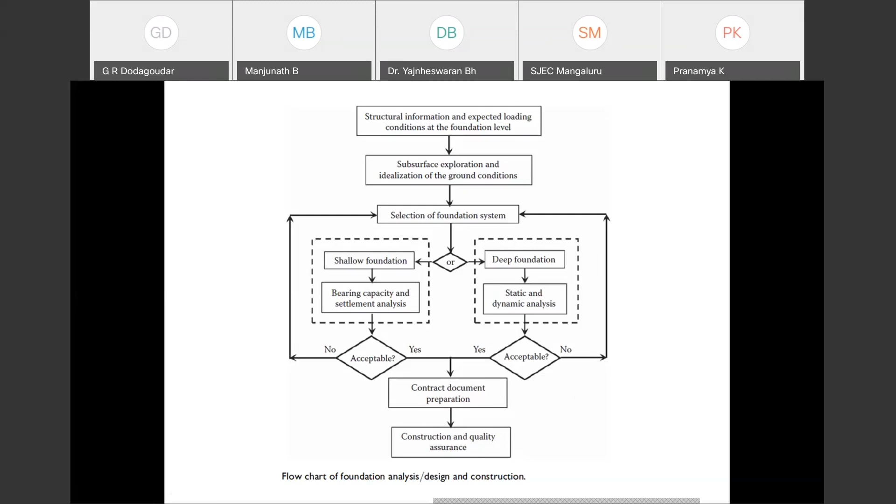You have to meet all the requirements before going ahead with continuation of the foundation construction.

This is just a building model, actually constructed in Bangalore. The name is Jain Swadesh apartment.

If you consider it a fixed base structure, that means you are disregarding the presence of soil or any geologic material. Indirectly, what you are saying is the stiffness of your geologic material is much higher than your structure. Only then do you go for a fixed base structure.

If you want to consider the presence of soil, let's assume it is a raft foundation below that structure. You can replace your soil with a bed of springs—that's called the Winkler hypothesis, which they used to analyze the building.

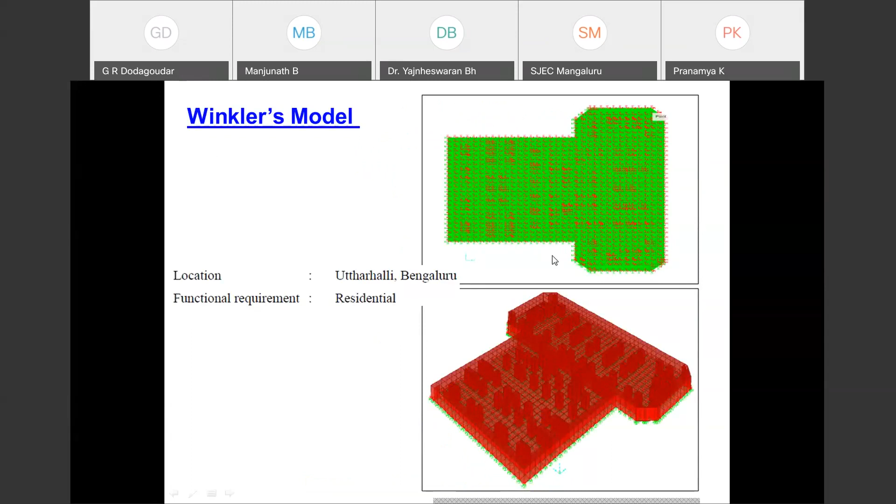This is the model based on the Winkler model, where the raft is discretized and the Winkler springs have been evaluated. Basically what they've done here is consider independent Winkler springs.

In case you want to bring in continuity, one can go for coupled springs. Even if you don't want to use this Winkler hypothesis to analyze your soil foundation structure interaction, one can think of using a certain amount of soil beneath your foundation.

Here you consider soil as a continuum element. You divide the soil into a number of continuum finite elements for analysis, establish the proper boundaries, and then use finite element software to analyze the structural response.

Then you will go ahead and construct the structure in the field.

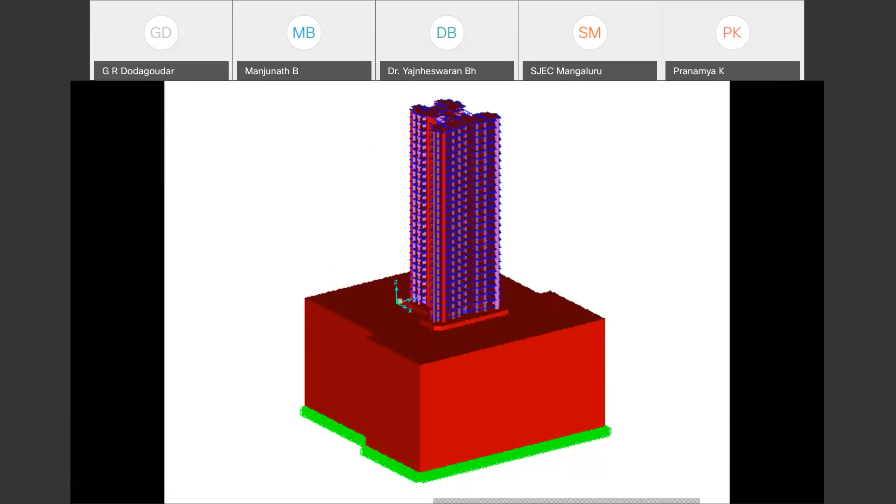With respect to deep foundations, take for example an isometric view of a pile supported structure. It may be any structure—a pile supported bridge abutment, pile supported bridge piers, or for that matter any building.

How are you going to analyze it? These are the piles, and this is the cap. If the cap transfers a certain amount of structural loading, it is called a pile raft foundation or combined pile raft foundation. How are you going to analyze this?

As far as our present topic is concerned, I want to tell you about two approaches: one is the substructure approach, and another is the direct approach.

In the substructure approach, how do you model it? First, you have to reduce your physical system into an equivalent mathematical model. Once you say it's a mathematical model, it simply means a differential equation. Once you have this model, you think of using the substructure method.

Earlier, we used to use the substructure method, but nowadays there's no point in going for this, since software is so powerful. In a single go, you can analyze the combined soil structure system.

How are you going to analyze your soil structure interaction effects using the substructure approach? These are the ingredients of the substructure approach: theta FIM and U FIM are the foundation input motions with respect to rotation and translation.

Then basically, what are you doing here? These are the pile elements, and the soil is replaced using a set of springs. To take care of tip resistance, you use KT. To take care of PY resistance, you use KH. To take care of skin friction, you use KV.

Then you combine with the structure and perform the soil structure interaction analysis. In this case, only linear analysis is possible—basically you split into two parts, analyze, and combine the response. Combination of response is possible only when you consider linear analysis.

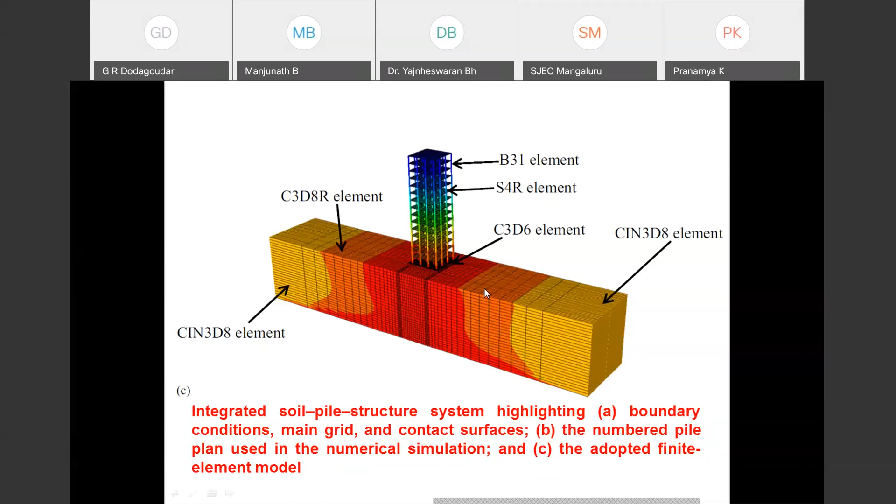Anyway, we have to go for development. When you are going for development and progress, please keep this in mind: sustainability is very, very important. Otherwise, there is no point in going for it. Otherwise, what will happen? You will not keep anything for the future generation. And then, how sustainable development will be useful in case of engineering and design.

And then a few books, especially for the students, those who want to explore this particular field. There are standard books, and most of the books are available online through those web pages.

Then I want to tell you how you are going to learn concisely. There is no point in using a brute force approach. Nowadays you can use the techniques. And then I want to explain a little bit about mathematical modeling of a physical system.

Then followed by basics and analysis of soil structure interaction: the kinematic interaction, then inertial interaction, and then analysis of a simple soil structure system. Then I'll go on to the soil pile structure interaction.

Herein I am going to discuss a little bit about forms of loading, pile subject to axial loading, pile subject to lateral loading, and how you are going to use the differential equation in order to know the pile resistance to the applied loading, then coming to pile groups, and finally dynamic response analysis.

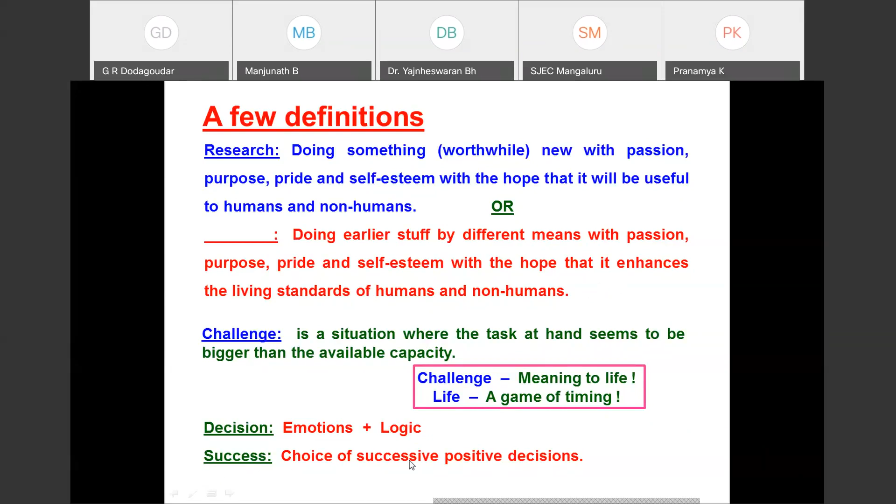Many times you're going to create controversy, or sometimes you will accept that at least you don't know something. At least accepting that I don't know something is also a type of knowledge. And then, why do you do research?

First of all, what is the objective or aim of doing research? First, I want to become a top-notch researcher, or else I want to do something great for our country. That is how the aim and objective will be there. Specifically, the objectives of our research are basically to experience the sheer joy of research, through happiness, ecstasy, and delight. The second is to share this joy with fellow researchers, to inspire future generations to pursue this career. This is also very, very important.

You have to bring in the young generation to continue this profession—for publishing new findings, for name and fame; anyway, people are doing this, even in IIT. Improving the designs: even though you are not going to create new knowledge, at least you have to improve the existing design methods according to currently known procedures. That is also very, very important. That's the reason I have given the second definition of research like that.

Then lastly, for the well-being of fellow countrymen and women. And then you have to do something for non-humans, because we are depending heavily on non-humans. These are the objectives of carrying out research.

This is what I already mentioned: our outcome of research gets value when you publish in good journals. Research means a lot of thinking is involved—productive thinking is also called research. Thinking clearly and effectively is the greatest asset of any human being. One has to think properly. If you are thinking improperly, you see what will happen.

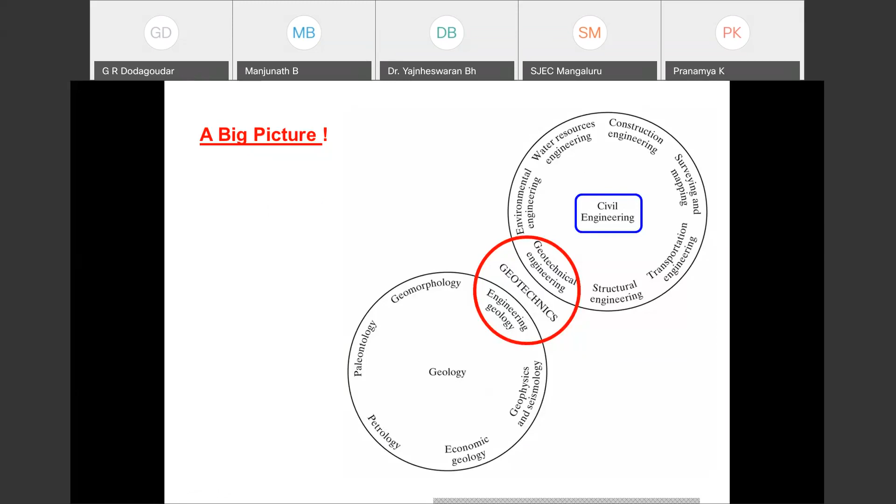And then from the source to the site of interest, that energy has to be propagated in the form of seismic waves. Basically, the seismic waves are the agents of energy transportation. Energy will be released here, and that energy has to be transported. It will come and hit your structure, then you have to analyze it. We will talk a little bit about wave propagation later.

Okay, what is geotechnical engineering? It is a simple definition. Basically, it is concerned with the engineering behavior of earth materials. When you talk about structures of geotechnical engineering, these all come under the structures of geotechnical engineering.

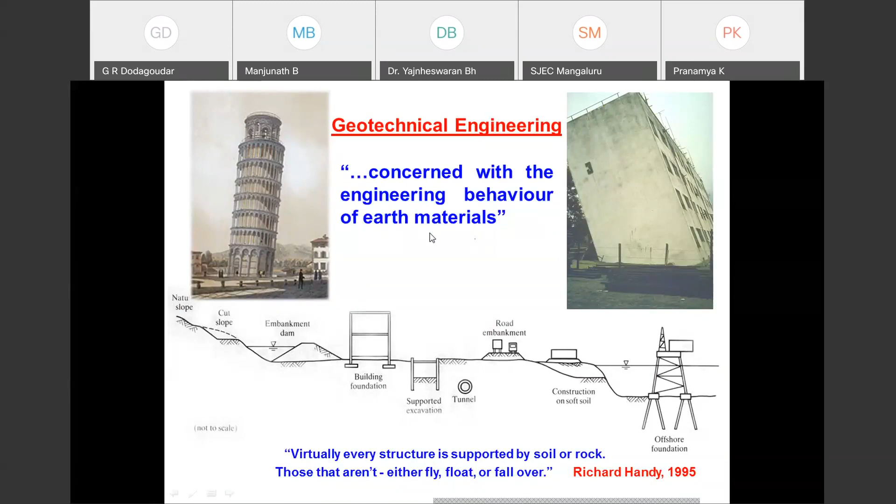Then, how do geotechnical engineers miss the big picture? Most of the times, we don't know what the big picture is. Big picture in the sense that you have to have a comprehensive and qualified understanding of everything before attempting to solve any problem in geotechnical engineering.

In that sense, please take this question. First of all, you have to understand what is the biggest problem. How do you solve the biggest problem? We will see that later. First of all, you have to identify what the biggest problem is. Once you identify it properly, there are many experts or many software tools available. How are you going to solve the biggest problem?

Let's see. Now we will look at sustainable development. Anyway, development has to take place, but it has to take place in a sustainable manner. With respect to that, this is a statement given by Einstein 70 years back: we shall require a substantially new manner of thinking if mankind is to survive. You can see the seeds of sustainability were shown at that time already.

It is our duty to understand the meaning in between these words. Okay, what do you mean by sustainability or sustainable development? It is a comprehensive definition: a concept describing mankind's ability to create a world for humans and non-humans that environmentally, socially, and economically provides for current population needs without damaging the ability of future generations to take care of themselves. This is very, very important.

Basically, if you put this definition in simple terms, you have to enjoy enough, you can allow others to enjoy enough, and then finally you have to keep enough for the future generation to take care of themselves. That is the definition of sustainability.

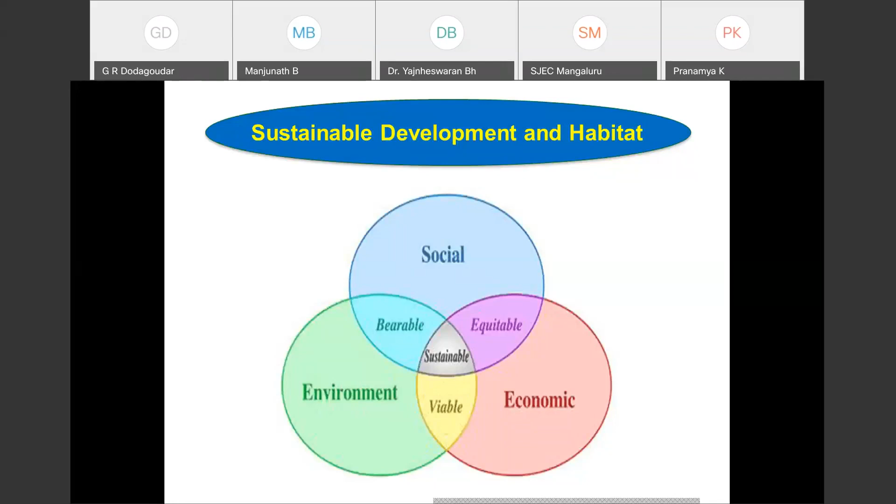Okay, then how to handle this? Basically, you have to jump into environmental design. There are two things in this: one, design for environment, where usually you talk in terms of 10, 20, or 30 years. Now, anyway, that is also outdated. You have to go for a design for sustainability.

Anything you do on ground will definitely have some impact on the environment. If the impact is very small, the environment will take care of it, and you're not going to have a lasting impact. But if your impact is too much, then you're going to damage the environment.

That is the reason one has to be very careful. Even though you are going for foundation design, please think of minimum more than 100 years, or even 500 years, especially when you are building temples or creating historical constructions or legacy for the future generation.

Then what is development? I hope you know what is development. Let's assume you have got degrees from BTech to MTech, MTech to PhD. No doubt it is a development, but the development has to lead to progress. That progress has to lead to wealth. Then only it is called development, otherwise it's not development. Development maybe is having progress plus wealth inside.

Okay, and then with respect to the sustainable development, these are my definitions of engineering. This is the definition of engineering: application of scientific principles to the solution of particular problems in a safe, efficient, and economic manner. Otherwise, a simple definition follows like this: an activity concerned with the creation of new systems for the benefit of mankind.

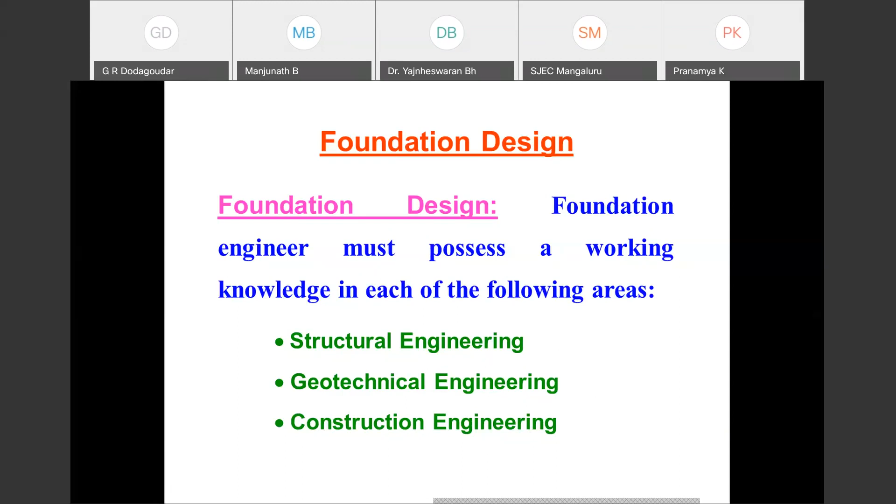Then with respect to foundation design, the foundation engineer must possess working knowledge in each of three areas. Structural engineering, you have to know a little bit about structural engineering. Even though you are not doing anything, at least you should know how structural engineers are going to evaluate the loading at the foundation level. You have to think of how to design foundation, not only with geotechnical considerations but also structural considerations. You have to understand the principle and design methods of geotechnical engineering, and also a little about construction engineering. Let's assume you have designed a foundation. If nobody comes forward after raising the contract documents, that means your structure is so complicated that with existing tools or whatever methodology is available in India, it's not possible. That's the reason we have to understand construction engineering a little bit.

Okay, with this we'll move on. This is what is the big...

Sir, sorry to interrupt. Participants are feeling it's a little fast. Okay, no, basically these slides are very simple, they are all self-explanatory, that's the reason they should be very fast. The new generation will be much faster than us, that's the reason I have given it this way. No problem, I'll go slow. Don't worry. Okay, okay, okay.

Dear students or participants, this is the role and scope of foundation engineering, or geotechnical engineering, or you can say it is ground engineering. An understanding of geological structures is also very, very important.

Let's assume unknowingly you have put an important structure on a fault. Then you think of, after construction of a 100-story or 120-story building, what are you going to do? There are many ways how to remedy the situation.

An understanding of geological structures, materials and processes, combined with systematic application of investigative, scientific and mathematical techniques, produces practical solutions to ground related problems for the benefit of society.

Whatever you do, you simply go out and literally watch construction activities with little understanding about geotechnical engineering. You'll understand the role and scope of foundation engineering.

These are the general types of problems encountered by engineers, basically design. If you don't know design methods, you're not going to do any design. Then even though you have a design, in order to check whether it is properly designed or not, you have to understand something.

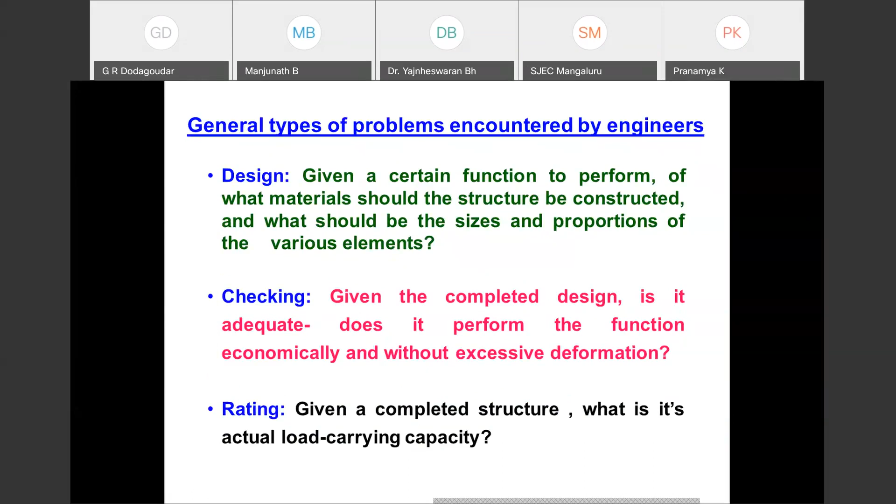In that sense, I have given this. Then design and design processes are intensely related. What do you mean by design?

I already said another definition of design is a process by which an optimum solution is obtained. The solution is supposed to be optimum, but you don't have to go for a 100% optimum solution. In any design, certain criteria must be established to evaluate whether or not an optimum design has been achieved.

Basically, if you talk about shallow foundation or deep foundation, you have to satisfy the bearing capacity requirement, as well as your settlement should be well within the allowable limit. That is how we are going to satisfy the design criteria.

With respect to this particular foundation, it is called a combined pile raft foundation. This is the raft, these are the piles. If you are not allowing the raft to transfer any load, it is called a pile cap, which simply transfers the structural load coming from the column through the pile cap to the piles. If you are allowing a certain amount of structural loading to be transferred via the raft with direct contact with the soil, it is called a combined pile raft foundation.

Let us assume F total is the total load coming on your structure. The resistance is coming because of your pile, which has two types of resistance: one is the tip, and the other is the skin. Then you will also have resistance offered by pressure.

Your total resistance offered by the combined pile raft foundation (CPRF) should be much higher than your F total, which is your structural load. Load is supposed to be less than or equal to resistance. This philosophy one has to use in order to satisfy any design criteria.

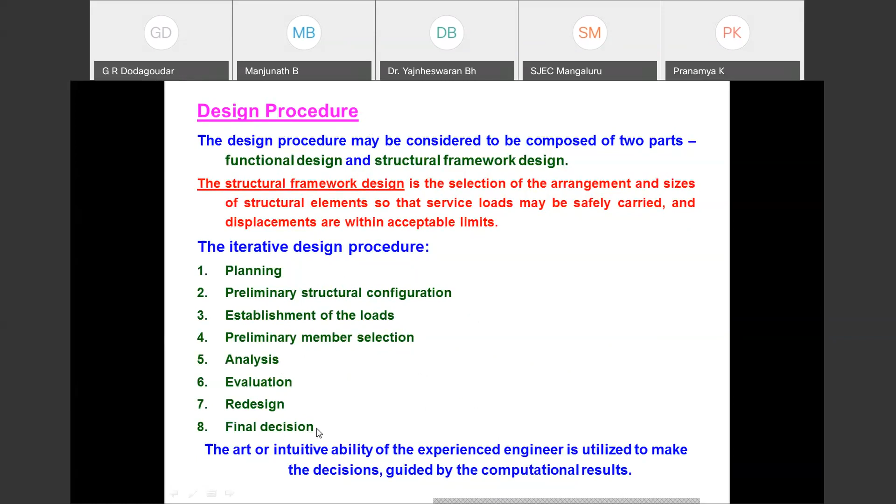For that, you have to depend on the IS codes or other codes. Then you have to select preliminary member selections, perform analysis, evaluate, and redesign. Basically here you are going to use the loop. Then finally you will go for the final decision, while making use of the intuitive ability of the experienced engineer.

Building and design codes are equally important. Whenever you want to build something, you have to follow the relevant design codes. The design codes are not ultimate, and they may not be much wiser than your engineer, but in case you don't have any design codes, people won't follow any rules or regulations, and they will put the public in danger. That's the reason: in order to protect the public from excessive damage due to not following the codes, one has to follow the codes.

What do you mean by design? Design means it has to satisfy certain loading for the designated time or under certain environmental conditions. Take for example earthquake resistant design: you are going to specify certain earthquake loading, use that loading, then proportion all the building elements, and then conceive the structure as a system.

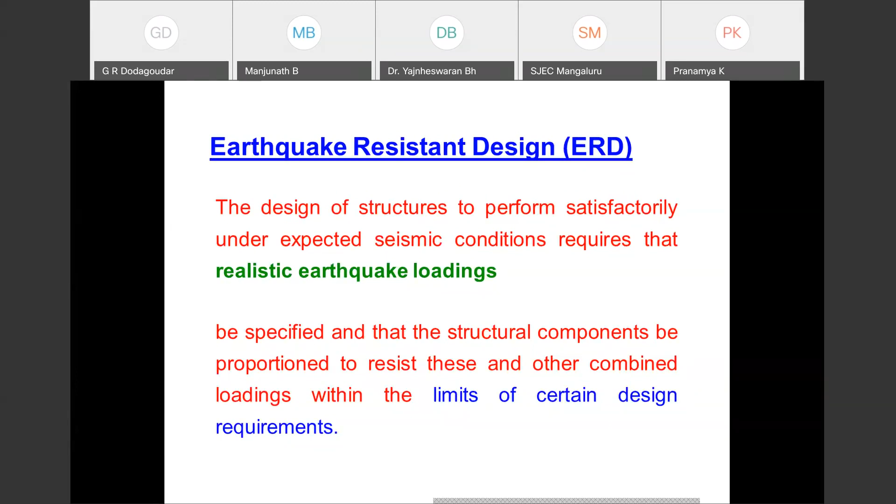If that structure is subjected to that particular loading, it should behave the way you intended. Then you can say the structure has been designed properly.

How does one assess the acceptability of engineering design? There is no single answer for this, it varies from person to person. In case you have a lot of uncertainties, even in your soil report or in the properties of your structural materials, you have to quantify the uncertainty.

In case you want to do a little more in earthquake engineering, we follow the term called performance-based design. How complicated does it need to be? It should not be too complicated, otherwise others will not understand. Especially at least 50% of understanding should be there for the engineer who is constructing on field, so you have to keep that complexity within that limit.

Anyway, this I already told: application of results of known methods of analysis is a design.

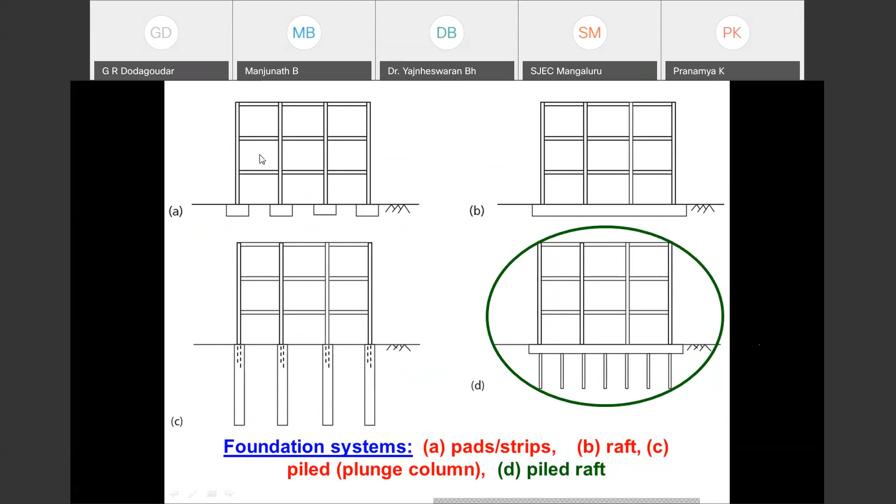Now, these are the different foundation systems. Here we have shallow foundation, the raft is also a shallow foundation. Sometimes you have a pile foundation or plunge columns. This is what is our pile raft. These are the different options for foundations.

If the ground is perfectly all right, you can bear on natural ground. Otherwise, you can replace the ground and fill with good material, or have compacted, consolidated ground, or have a composite ground, maybe foundation on stone columns, and then go ahead. Otherwise, if you have very soft or weak soil beneath the ground, you have to bypass using solid inclusions called pile foundation.

This is what we have already seen, it is a pile supported structure. When you talk about pile raft foundation, let's assume it is a raft, these are the piles. I want to transfer the structural load as per a static analysis and design of PRF, pile raft foundation, is concerned.

What is the big picture? The big picture is simply load versus settlement, that's all. As per static analysis, depending on your understanding of the soil structure interaction effects, you can decide. You can keep your pile and raft together under elastic, then leave here at this level. This is your allowable settlement, and this is your allowable load on the structure.

In case you want to make use of your piles at working load, that means serviceability load, you can increase certain loading, but one has to be very, very careful. Sometimes you will be somewhere here, that means 10% or 20% of this line. That means basically you are effectively using your solid inclusions under serviceability loading.

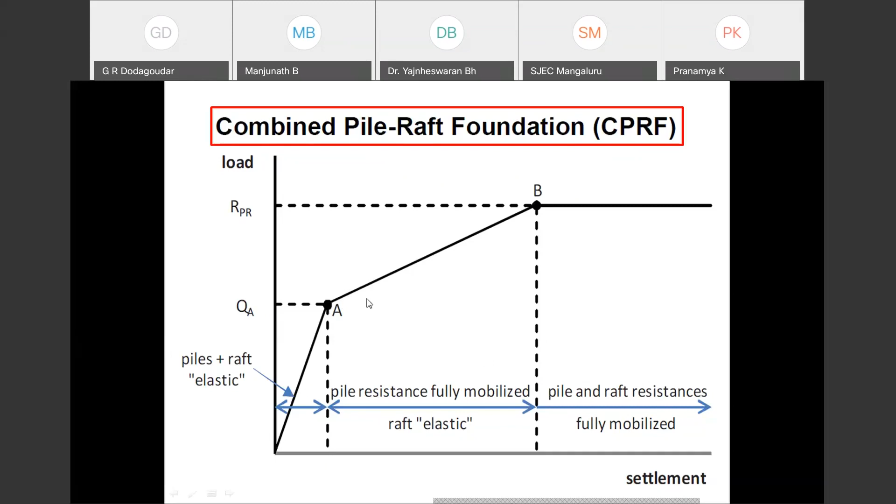As for dynamic loadings, you have to get this loading under cyclic loading, basically considering the degradation in material properties. Then you have to choose the analysis procedures accordingly.

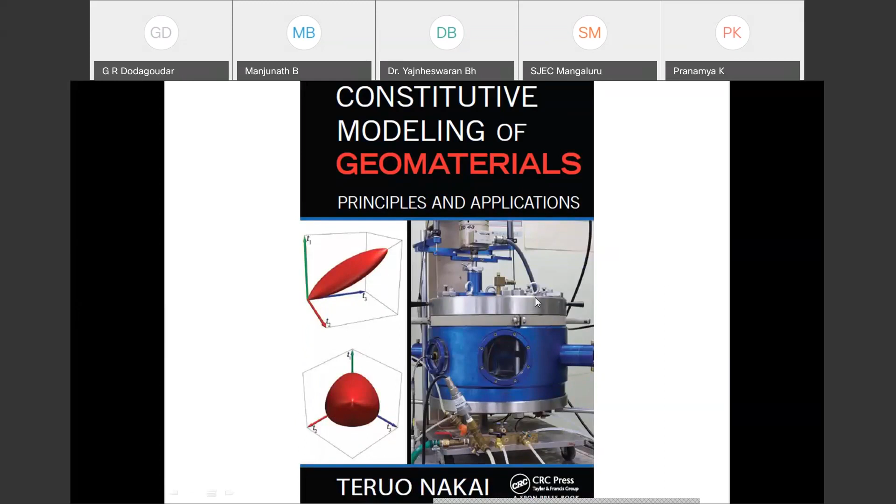And then if you want to understand the constitutive models, basically stress strain relation, this is the most comprehensive book, recently published by CRC Press. This is also available. And then this is Advanced Geotechnical Engineering, here they have considered a lot of soil structure interaction effects, written by Desai and Zaman.

The Zienkiewicz book is a little bit advanced. Only after studying from simple books, please jump into that.

What do you mean by mathematical modeling? And what is finite element? In mathematical modeling, you will end up getting differential equations most of the times. Then in order to solve differential equations, there are a number of techniques, but FEM is more powerful and it is also one of the most important contributions of the last century. So how are you going to study this concisely?

Say I want to become an expert in soil structure interaction. First, you have to understand the soil structure interaction effects, and how these effects will govern the behavior of your foundation as well as structure. For that, you have to have certain background and historical knowledge. Let's assume the soil structure interaction effects have been disregarded during analysis and design. What will happen if you erect that structure on ground? Definitely you're going to see some severe damages or collapse. Then some idea or concept has to be there.

Then you have to talk about the principle. Principles are very, very important. Once you have a principle based on certain approximations and assumptions, you can develop from there and get the theory. Theory means most of the times these are equations—in our geotechnical and structural engineering, these are differential equations. Once you have equations, simply you have to solve them. Before putting those solutions on ground, you have to validate using experiment.

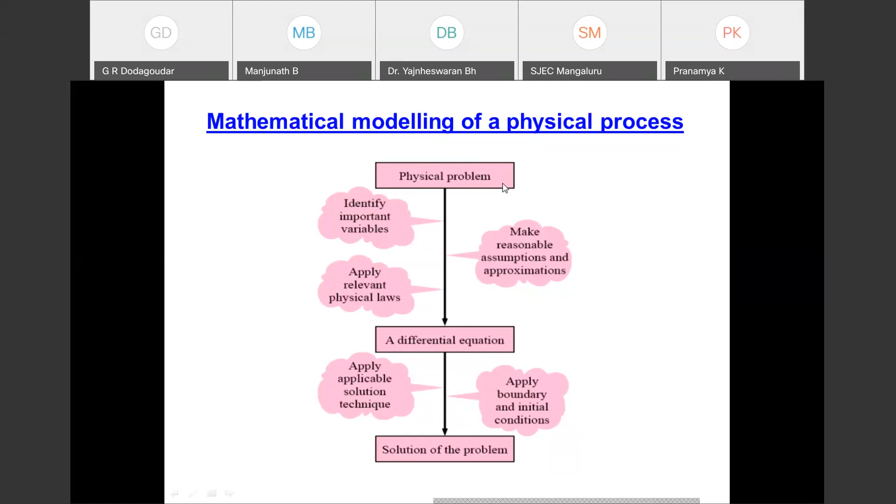In order to analyze your structure for dynamic loading, fixed base structure subjected to earthquake loading, you can simply make use of mx double dot plus cx dot plus kx equals minus m times ground acceleration. In order to derive this equation, you have made n number of assumptions, and then you have made use of F equals ma. That is the principle. This differential equation itself is a theory. If it is simple, you can apply the applicable solution technique. Then you have to apply boundary and initial conditions. Get the solution. The solution has to be understood with proper knowledge of your physical system. That's it. Then you are addressing all these questions as part of mathematical modeling. What you have to see is, is there a relation between the type of physical process considered and the equations that result? This is very, very important.

You can see this to understand. For steady state seepage, you're going to get the Laplace equation. You may be using H, del square H by del X square, something like that. It is a general field variable. As far as consolidation is concerned, you have this equation with CV, coefficient of consolidation. As far as one dimensional wave equation, you have some coefficient.

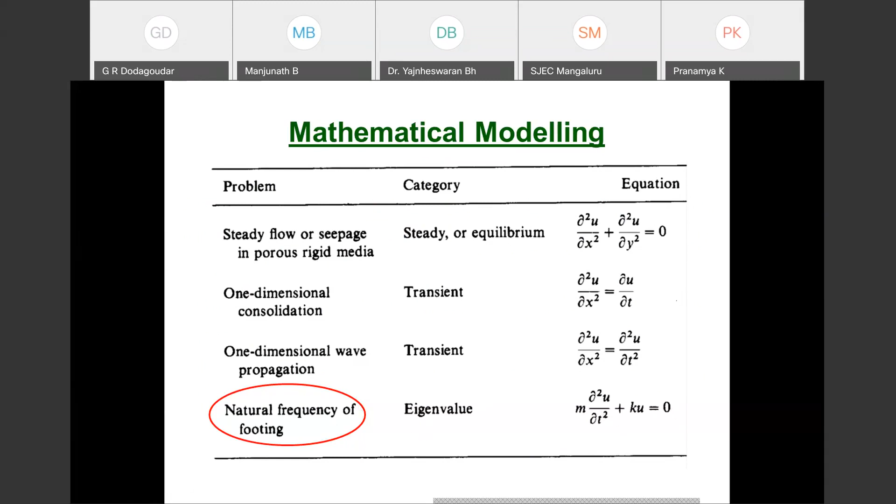In order to analyze the frequency of your footing or foundation, one has to go for a generalized eigenvalue problem. If you set it up, you will get mu double dot plus ku equals 0. You will solve and get a set of frequencies, and corresponding to each frequency, you will get the mode shape. Then you will analyze your building accordingly.

Basically, your continuum mechanics, I hope you know what this subject is. Continuum mechanics is the birthplace of mathematical models. Why study finite element? Once you have the differential equation, you can use any number of methods, but finite element is very powerful. That is the reason one has to go for finite element.

This is the big picture about finite element. You can do physical modeling, maybe 1G or NG, and still predict the behavior of your actual structure before you erect it. Otherwise, you can use numerical modeling like finite element. But finite element requires constitutive models. These constitutive models have to be verified by performing element tests. I hope you know we are doing a lot of element tests in the lab. With that, you will get the parameters of the constitutive model.

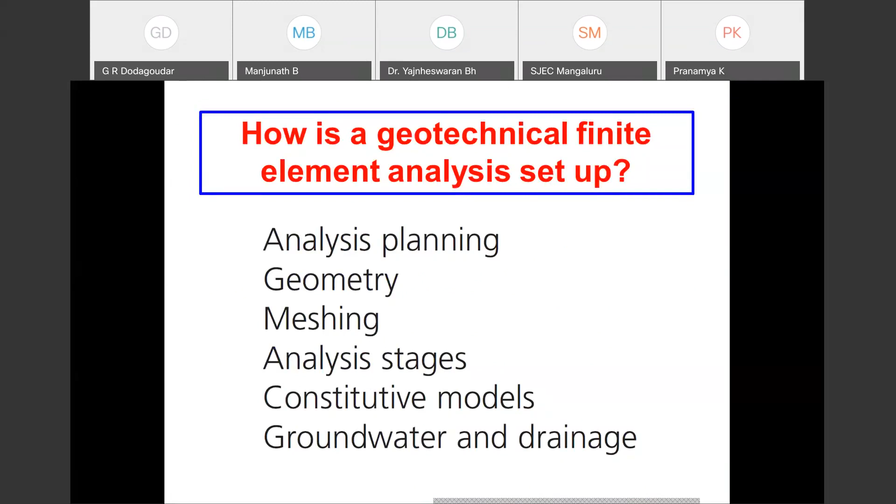There are a few questions associated with finite element analysis. How is a geotechnical finite element analysis set up? You can put your structural engineering or even water resource or environment. How is a structural finite element analysis set up? I hope you may know this using SAP or STAAD Pro. And how are constitutive models selected? This is very, very important. You have to understand the structural loading, type of subsurface profile, and those properties. Then you decide whether a linear constitutive model is okay, or non-linear, or advanced constitutive models are required.

And then, how are soil and rock parameters obtained? For that, you have to perform laboratory and field experiments. Then, how are geotechnical structures modeled? How are you going to model your structure? How are you going to choose the constitutive models for structural materials? In case you suspect interaction effects are there, how are you going to consider the soil structure interaction effect?

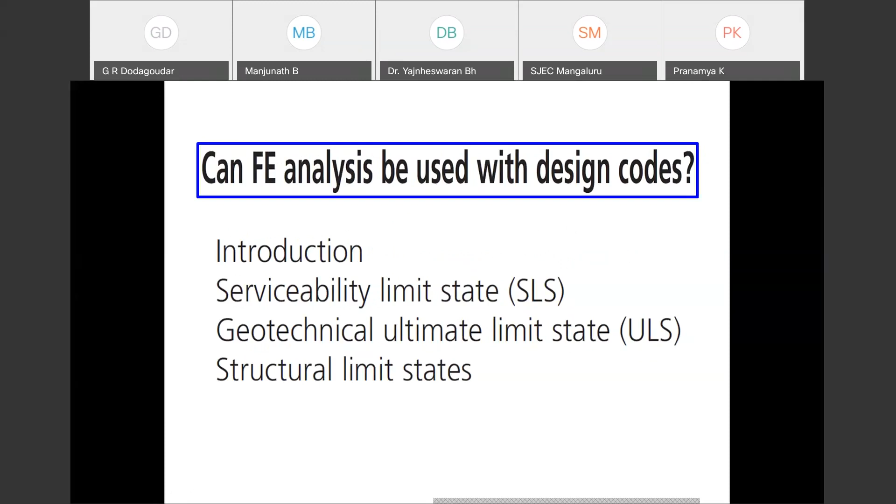Then, can FE analysis be used with the design codes? Yes, right now you can use it. In STAAD Pro, you have almost all the codes. Then you can address all these limit state requirements.

These are the finite element results. These are actual results coming from the load test conducted by Hyder Consulting. See the maximum load on the pile head, that is 60 meganewton. The corresponding maximum pile head displacement is 2.2. Finite element is able to touch the maximum 60 meganewton, as well as the settlement obtained is 2.6. Invariably, finite element has to give a little higher deflection or settlement for the lesser load. Perfectly all right. These analyses have been performed in Germany.

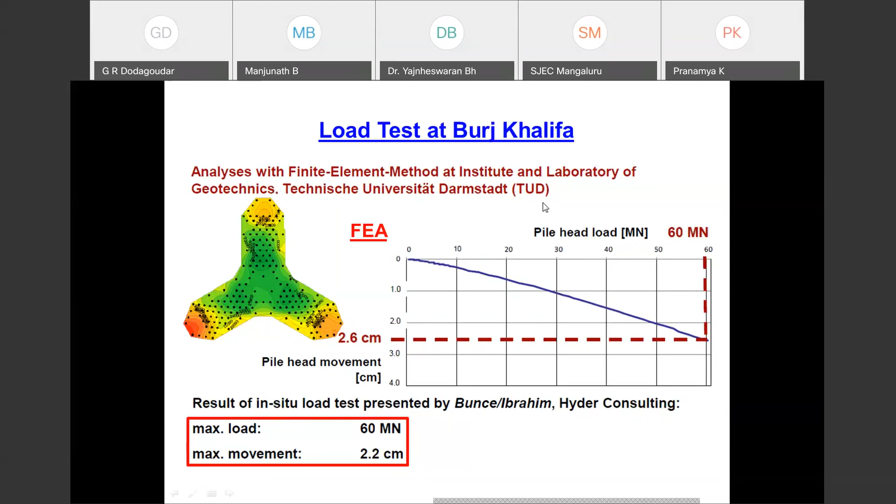Along with the construction, design principles are equally important. I have touched a little bit about this. During construction, one has to monitor.

During monitoring, you have to make a lot of decisions, making use of this observational method. Based on monitoring, you are going to get the settlement information or whatever, and then you have a computational tool. Literally, you have to play in the computer.

After considering 10 story, what are the settlements? After considering 20 story, you compare. If any action is necessary, if you have not defined your loading properly or your building process, basically how are you going to construct?

One should not erect anything on ground in 1 day or 2 days. You have to understand the settlement behavior of your soil. Accordingly, you have to decide the rate of loading, basically rate of erection of your number of stories. That is how we will make use of this observational method.

But one has to be very careful when using analysis, especially numerical analysis tools. You have to understand that quality control and assurance is also very, very important during construction.

Then comes the soil structure interaction. I want to touch upon a little bit of basics regarding kinematic interaction, inertial interaction, and simple analysis of soil structure interaction, and how one has to perform this using SAP and STAAD. What are the effects? Please understand the effects - if you don't consider them what will happen, and if you do consider them what will happen.

With respect to soil structure interaction analysis, I'll talk a little bit about deep foundation. Then I want to tell you a little bit about how you are going to analyze your single pile for shaft behavior - that means shaft and tip. Then analysis of single piles for lateral loading, then different forms of loading, and then pile group analysis, and then a little bit about the conclusions and remarks.

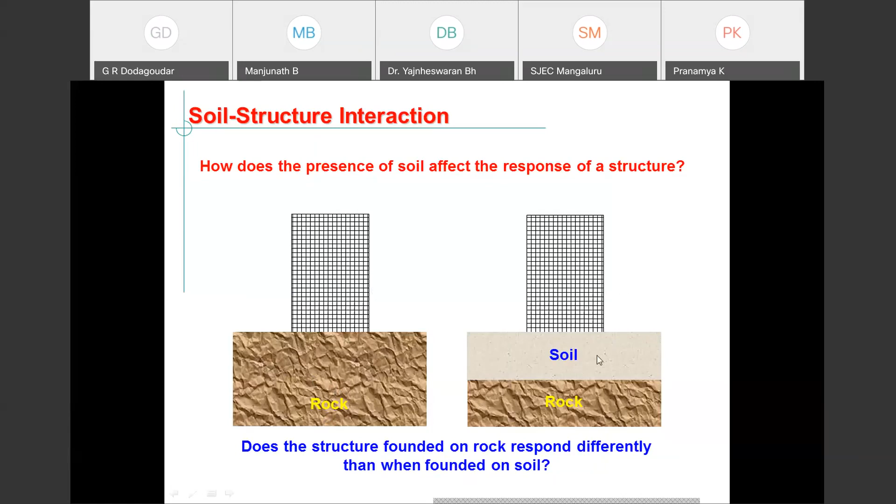Okay, these are some definitions. Let's assume you don't have any structure, and it is subjected to earthquake ground motion. If you record this through some recording instrument, basically the variation of acceleration with respect to time, it is called free field motion.

Basically, it is at the ground surface. If you have a foundation, and you are able to record the motion at this level, it is called foundation input motion, also called FIM. Basically, you have 3 translations and 3 rotations.

How does the motion at the base of the structure differ from the free field? Definitely, because of the confinement effect, you are going to have a different input motion here. That is the reason it is called foundation input motion.

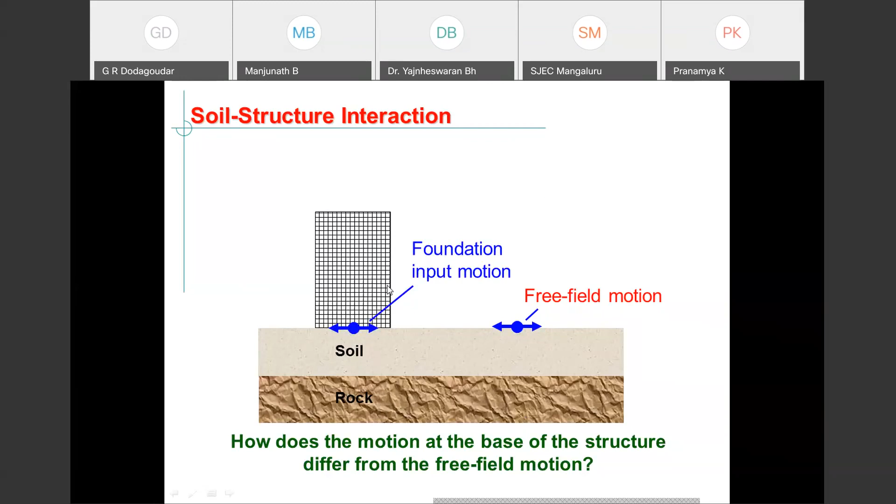If your soil profile is subjected to earthquake loading, and you have an instrument, it is called free field ground motion due to propagating seismic waves.

Let's assume you have a structure founded on a certain foundation. This is your ground motion at the building - if you are treating it as fixed base, and if you are a little far off, let's assume 100 meters away, there you are going to have the free field response. When you are close to your building, this motion is influenced by the presence of your building. That also you have to be very, very careful about. If the structures are closely constructed and they are very tall, then you have to be very, very careful.

If you want to get the response, basically you are going to get the response - the acceleration at the building top or wherever you want. Once you know the response, you can literally evaluate all force resultants or even deformations in the building. Okay, what is the definition of soil structure interaction? This is the definition.

The response of the soil affects the response of structure, and the response of the structure affects the response of the soil. This mutual interaction effect is called soil structure interaction.

Over the years, soil structure interaction effects have been studied under two headings: kinematic interaction and inertial interaction. Now there is no point in going for kinematic interaction and inertial interaction separately and adding together, because of powerful software, one can attempt all these in a single go. Just for explanation, I'm going to explain here.

What do you mean by kinematic interaction? Presence of stiff foundation elements on or in soil causes foundation motions to deviate from free field motions. The moment you don't have anything in the ground, you are going to have the free field motion. The moment you put your foundation, even though you disregard its mass, you have to consider the stiffness and geometry of your foundation as well as the soil. You are going to get a different free field motion. That is called kinematic interaction. Basically, you are going to get FIM.

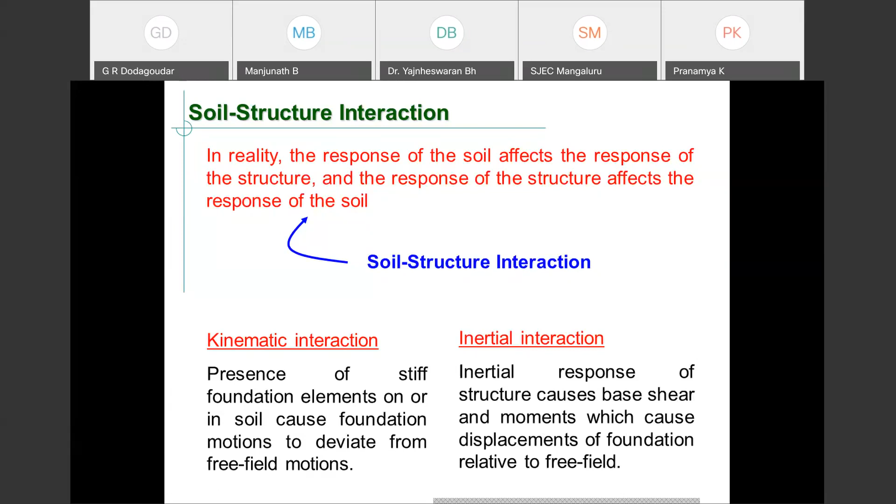Inertial response of structure causes base shear and moments. The moment you vibrate your structure, those vibrations pass to the foundation in the form of shear and bending moments, which in turn cause displacements of foundation relative to free field. These things you have to address.

How are you going to handle this? What are the effects of kinematic interaction? There are three effects. First is base slab averaging, which comes because of stiffness of foundation. Another one is embedment.

Basically, let's assume you have a pile foundation. Embedment is basically the variation of ground motion with depth. Take for example, you have a pile of length 30 meters. How is your ground motion going to vary all along the length of your pile? Take for example, you have a shallow foundation, thickness hardly 2 or 3 meter raft. Even in that case, ground motion is going to vary.

How are you going to quantify this? Let's assume an earthquake, basically waves will come and hit at the corner. What will happen to the intensity of your ground motion? If your incoming ground motion has high frequency content or low frequency content, what are the effects of wave scattering? Let's see what will happen.

What is the meaning of that? Surface motion is equal to free field motion. There is no rotation at the surface. Basically, you cannot see any rotation.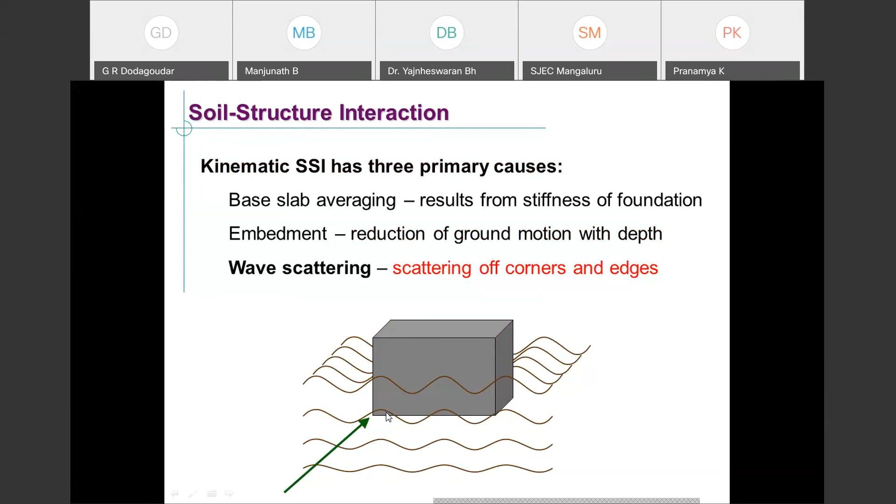The next one is scattering - how the waves get scattered at the corner. The wave comes, hits the corner, and this is how it gets scattered. This has an important effect with respect to the amplitude of high frequency components. Basically, it reduces the amplitude.

That anyway you have to account for while analysis of kinematic interaction. Okay, how are you going to do the soil structure interaction? What is SSI? SSI basically results from the compliance of soil, meaning soil is not going to have stiffness more than your structure. That means you have to respect the stiffness of your soil. Then you will have the compliance, meaning soil is not rigid, it will deform due to loads from the structure.

How are you going to understand? Basically you have three translations in case of 3D, then you will have three rotations like this. Then what is the relation between force and displacement? This is your stiffness matrix, also called compliance or foundation compliance. In dynamics, the same is called impedance function.

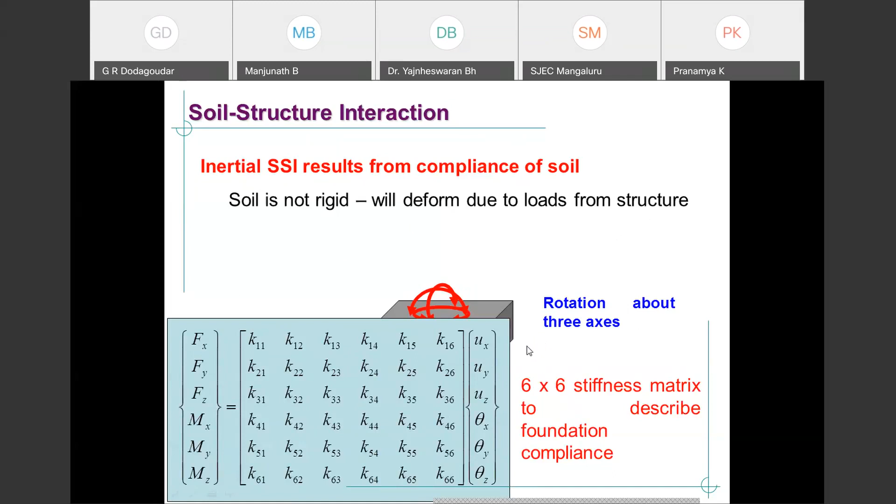Here we have three translations and three rotations. They are related, like F equals Kx, or M equals K theta. These are the rotational stiffness coefficients. In case of 2D, you have two directions, basically two translations and one rotation. This is our compliance or foundation compliance matrix.

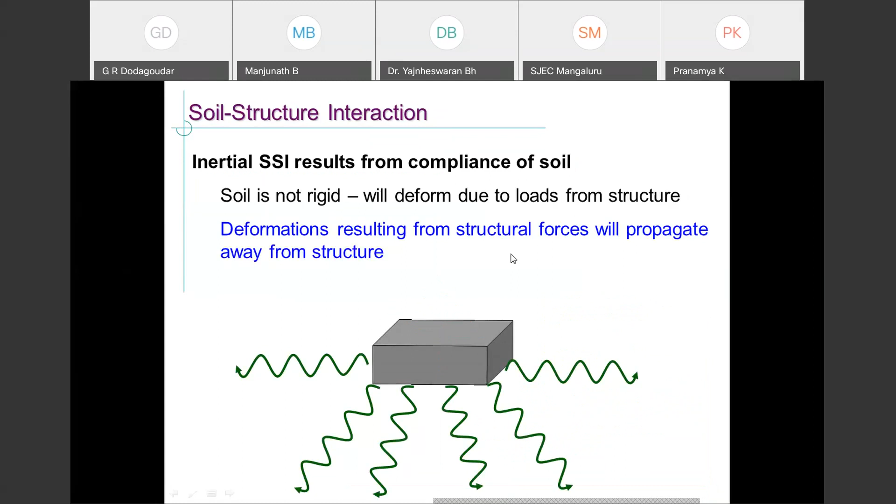Then deformation resulting from structures will propagate away from the structure, in case of soil structure inertial interaction. When you vibrate your structure, the vibrations will be put back into the soil. Anyway, they will be taken away - that is called radiation damping. Energy is removed through radiation damping. One should not consider beyond that; only thing you have to have is the boundaries far away from your foundation.

Then how are you going to analyze? There are two approaches. One is direct, in which we model soil and structure together. This is your structure, this is your soil. A certain amount of soil has to be considered depending on the width of your structure. You can decide where to put the boundaries, then you have to use consistent boundaries, or infinite, or transmitting boundaries here.

This is your ground motion. Basically, it requires a detailed model of soil and structure in a single computer program. It can handle non-linearities in soil as well as in structure. With respect to the substructure method, you can separate out - this is your kinematic soil structure interaction, this is your inertial. Then you can combine the responses so that you get the total response of your soil structure system.

Then what will happen here? You can use a different code for this, then you can use a different code for this, and then combine the response. With this, basically what are you doing? You are using the principle of superposition, meaning you are considering soil behavior as well as structure behavior as linear.

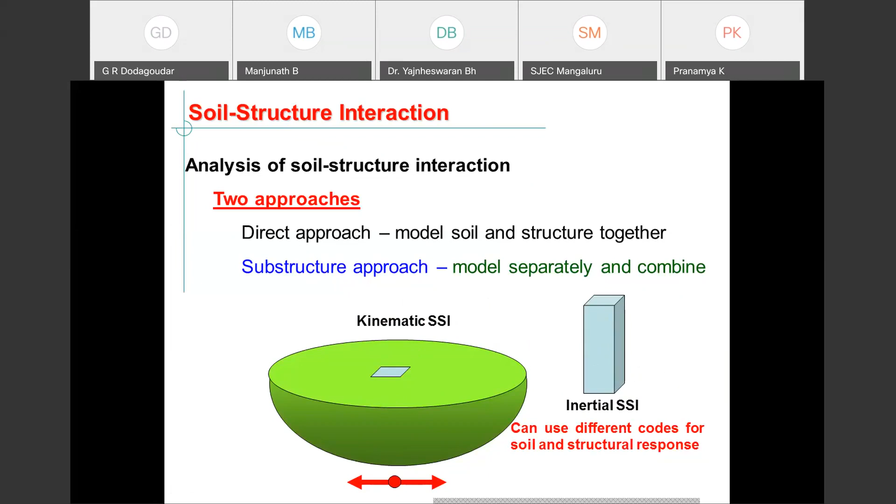Let's see how I am going to do the kinematic analysis of a soil pile structure system. Basically what you have to do - subjected to earthquake ground motion, you disregard the mass of your foundation, but consider the stiffness and geometry of your foundation as well as the geometry of your soil medium. Model the foundation as massless with stiffness, then apply the ground motion and see what happens. Compute the foundation input motion - with respect to this, it's a 2D structure we are idealizing.

Actually, piles may be running perpendicular to the slide, maybe some numbers. You are going to get one rotation, then u FIM and theta FIM means you have ux and uy as a function of time - that is how you evaluate it. Then you have to bring in your SSI and analyze soil structure interaction effects. These are influenced by stiffness and geometry of soil and foundation. Please understand, this is theory - that's the reason I put the title theory.

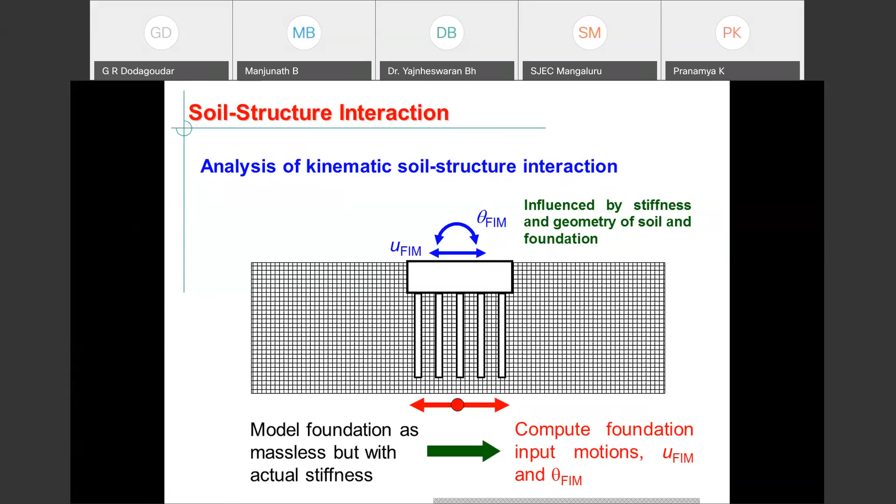Applications will come a little later. How are you going to get the foundation impedance function? Impedance function equals foundation stiffness and damping. In this function, you have the stiffness as well as damping. With respect to vertical loading, you can replace your soil with these spring coefficients - this is your foundation impedance function for vertical loading. Similarly, for horizontal loading you have these coefficients, and for moment loading you have these, especially for 2D.

With this, you can bring in your structure. Basically, you have all these as a 6x6 matrix. Then you can bring in your structure, and analyze your soil using these spring coefficients. You can use SAP or STAAD Pro to perform soil structure interaction analysis.

Based on the principle of superposition, analysis is frequently performed using an equivalent linear approach. Even though the soil and structural behavior is non-linear, you can use this equivalent linear approach to analyze the response of your structure. If it is a fixed base structure, you can apply ground motion directly, and you can carry out hazard analysis in order to get this ground motion.

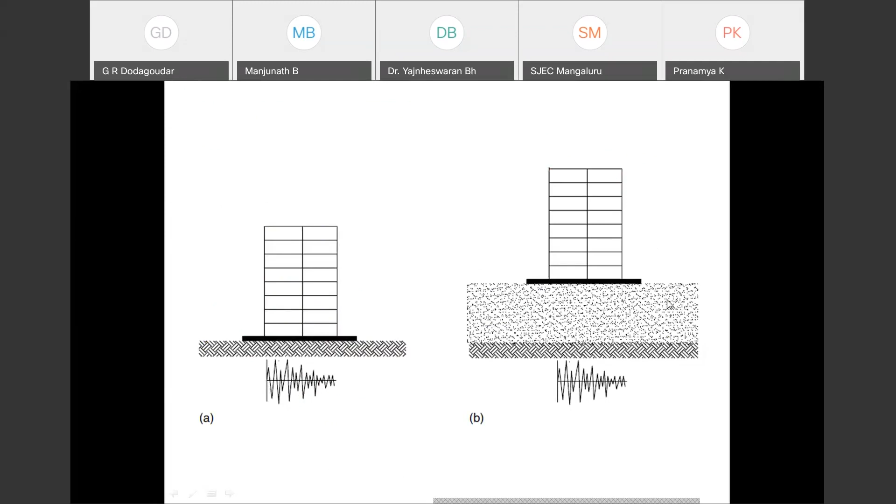If the structure rests on soil, you have to be very careful. Either you use spring coefficients, or you can divide the soil medium into a number of finite elements, apply the ground motion there, and perform the response analysis of your structure. There are many ways to get the ground motion.

Let's assume you have the ground motion at the ground surface. You can follow deconvolution to get the motion at the bedrock, then transfer it back up. You perform the ground response analysis, which is basically solving the wave equation, to get the motion at the building. Then you can perform the response analysis of your structure. Basically, this is what you are solving.

In case of soil-foundation-structure interaction, you are basically solving this equation. You have to apply this at the control point, and you have to have proper boundaries. There may be artificial boundaries. You can allow displacement to take place here, but here you have to arrest both displacements.

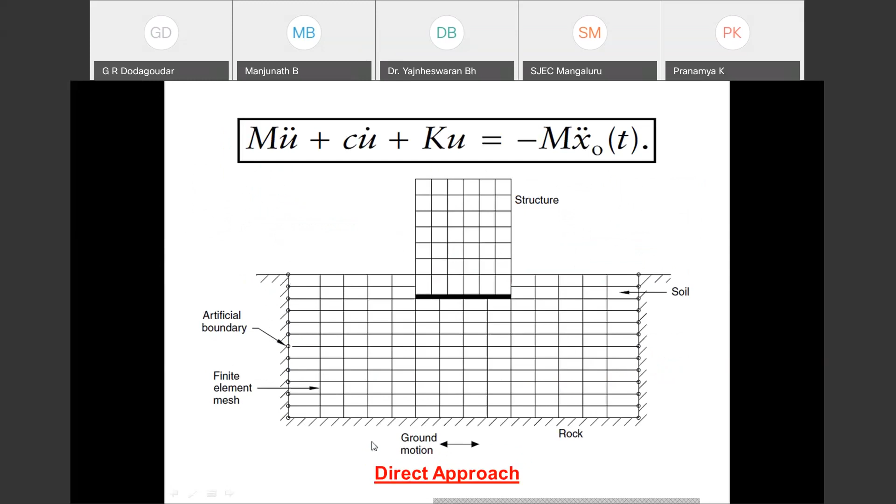In case you suspect linear soil layers with different properties, you can use an equivalent shear beam model to get the output at the ground surface. You can use this as an input motion for your structure and then perform the soil structure interaction analysis. What are the effects? Basically, since there isn't much time, I'll quickly rush through this and tell you more as part of the final.

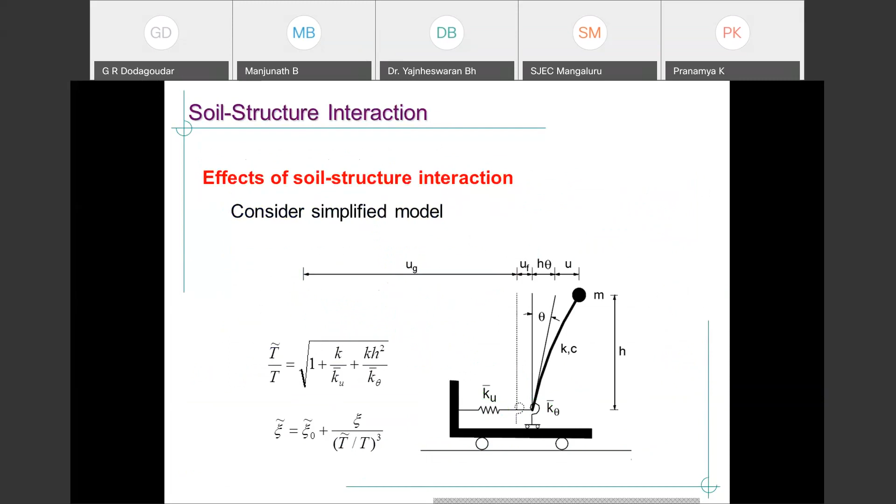Basically, let's see what happens - what are the effects of soil structure interaction? The explanation is given in the previous slides. With increased foundation flexibility, meaning foundation stiffness is lesser than your structure, what happens to your fundamental period or structural period? It increases - that's a lengthening effect you can evaluate from this. This is the fundamental period with respect to a fixed base consideration, and these are the stiffness values associated with this single degree of freedom system.

Damping also increases - this is your increased damping, known as radiation damping. Depending on the type of structure, if you have stiff soil with a soft structure, you can see whether there's an effect or not. In case you have soft soil with a stiff structure, interaction effects are definitely more significant. Those I have covered in the previous slide.

SSI can decrease structural deformation. This particular point corresponds to structural deformation, whether you consider SSI effects or not - this will be there. If you consider SSI effects, this will be slightly less, but total deformation will be more due to translation as well as rocking. If you suspect soil amplification, please account for that also in the analysis. This is a summary of what I have covered so far.

SSI is not significant for flexible structures on stiff soil. SSI can be quite significant for stiff structures founded on soft soil. The fundamental period of the soil-structure system is longer than that of fixed base structures, as I showed in the previous slide - that's the tilde notation. Effective damping of the soil-structure system is higher than the damping of the structure alone - you have to accept this.

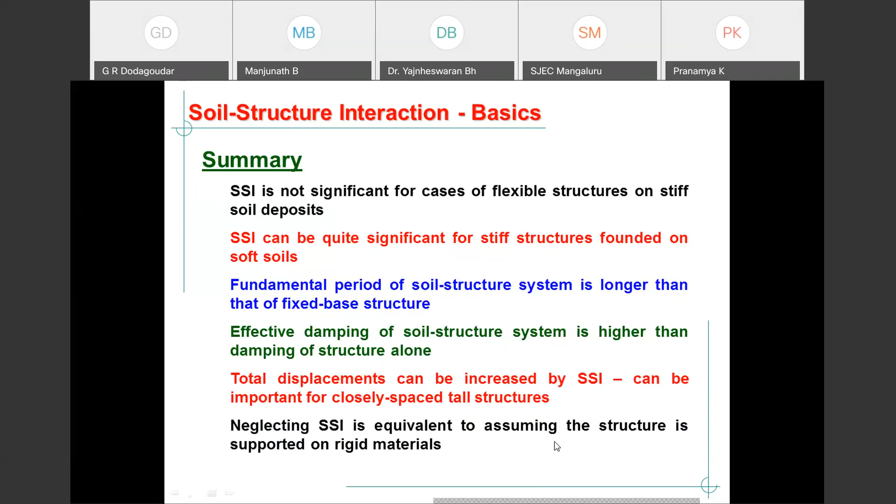Total displacements can be increased by SSI, which can be important for closely spaced structures. Let's assume you have high-rise structures that are closely spaced - if soil structure interactions are predominant, you have to be very careful, otherwise pounding will take place during earthquake loading. Neglecting SSI is equivalent to assuming the structure is supported on fixed or rigid material - this is as good as analysis of fixed base structures.

Let's move on to soil-pile structure interaction. Deep foundations are special with respect to two points, in which the depth of foundation is very large with respect to width - diameter of pile may be 1 meter while the length of pile may be 100 meters or 60 meters. These are not constructed by ordinary methods of open pit excavation; you have to be very careful. Pile foundations, drilled shafts, or well foundations require specialized construction equipment.

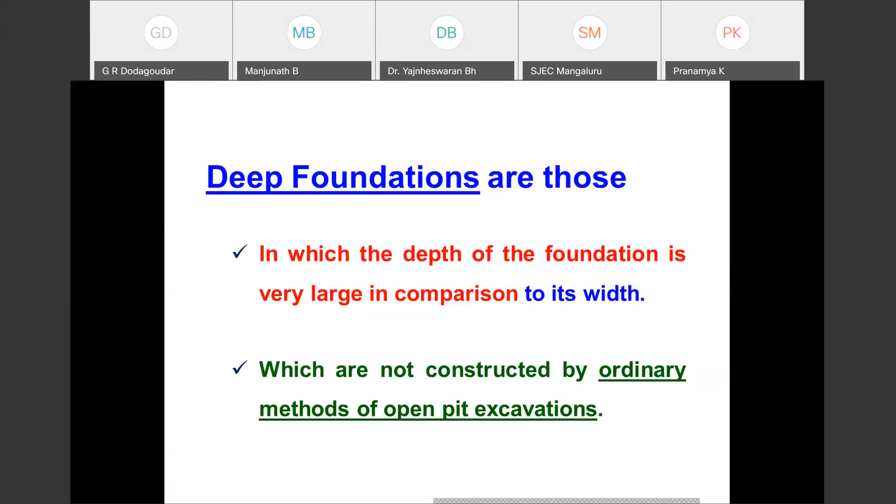That's basically related to displacement between the pile and soil at the pile shaft. For toe bearing, you need more than 10% of pile diameter, but this has to be evaluated on a case by case basis. Usually piles are used in groups, or any deep foundation element.

Why deep foundations? Because of poor soil conditions, or if you want to bypass weak material, one has to go for pile foundation or deep foundation, something like this. It may be subjected to this type of loading. If you consider a single pile, it may still be subjected to this type of loading in case of 2D analysis.

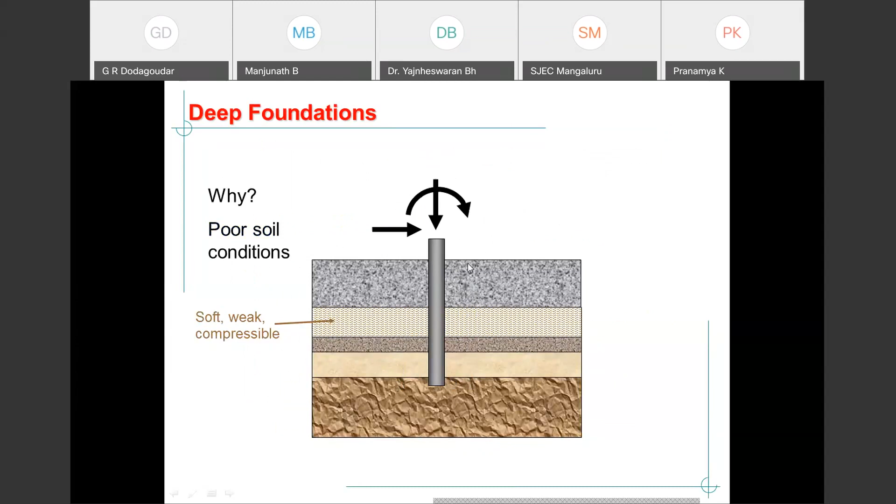Then a little bit about design. How are you going to get the allowable load on a single pile? If you have separate factors of safety for shaft resistance, you can use 1.5. For end bearing, you can use 3. In case of a single factor of safety, you can use 2 or 2.5. In India, we are using 2.5.

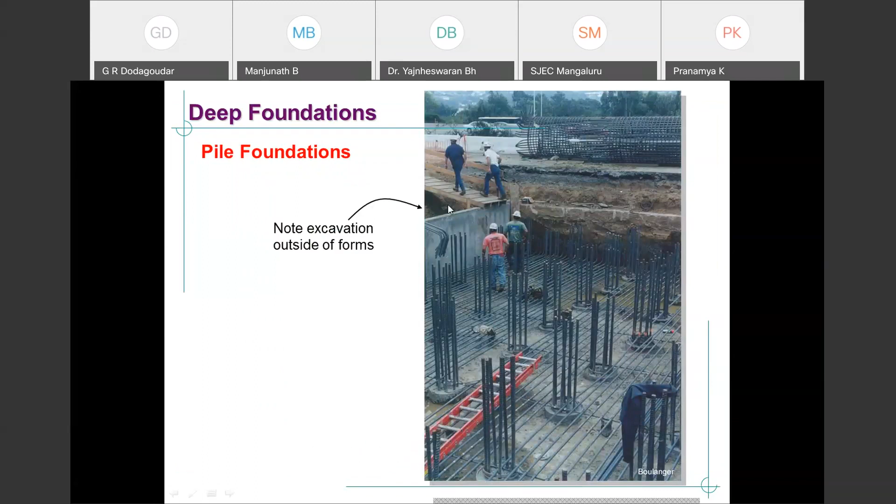Then this is what your pile foundation looks like. See the clarity, okay, these images are from America. And then see this, please note the excavation outside. This has to be filled properly, then only you can use the passive resistance offered by your pile cap. Similarly, note the excavation outside the forms. This is a drilled shaft.

How are you going to determine the vertical load carrying capacity? This is applied loading in the downward direction, which will be resisted by skin friction and tip resistance. Basically, it is high in clays, low in sand, and similarly it is the reverse here.

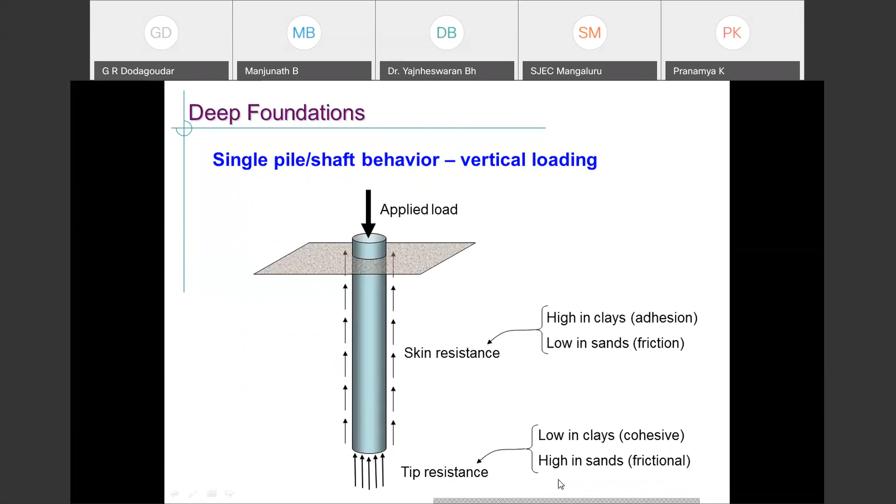If it is subjected to uplift loading, it is resisted by skin friction. In case of clay, if you have some suction, that will be active. Otherwise, one should not consider suction. So then, how do you measure the vertical load resistance?

You have to instrument using this. Otherwise, you can perform a pile load test, or else you can do a finite element simulation in order to get the load deflection curve. Basically, how are you going to get this?

You have to put strain gauges and apply the load in parts. Let's assume Q ultimate is there, and you apply it in one-fifth increments. First you apply one-fifth of that load, which is entirely taken by the shaft. Then you increase, and the shaft resistance gets mobilized, with a part of the end bearing coming into picture. Then you increase further, and when it touches the ultimate, both end bearing and skin friction are mobilized. Your Q ultimate is equal to tip resistance plus skin resistance.

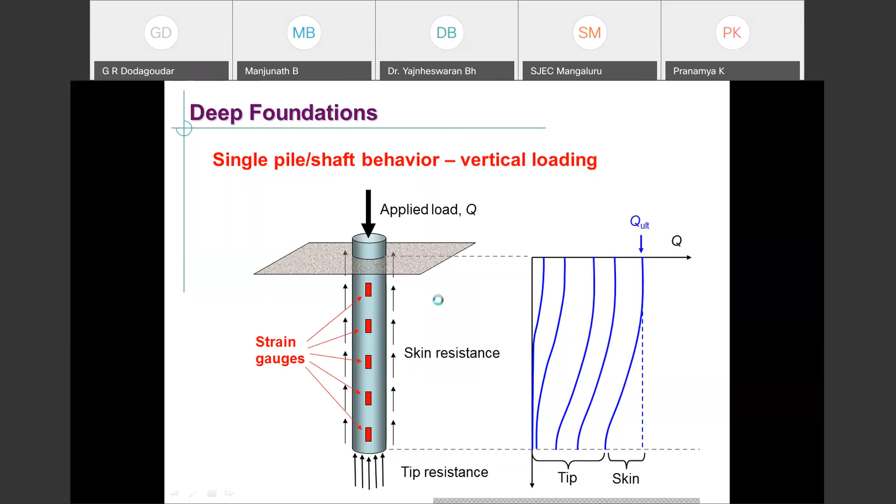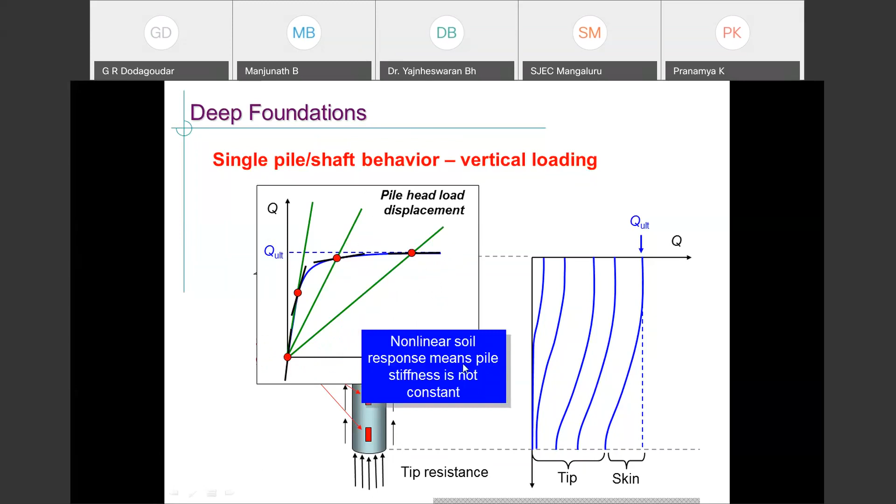The same is going to happen with lateral loading. Okay, without loading, this is how you have the lateral load on the pile. The moment you apply the lateral load, the soil is going to offer some resistance. That's called P, it is the soil resistance.

Then at large depth, basically what will happen is you'll feel as if the soil is going to move around the pile. There are many solutions available for P ultimate, so how are you going to get it? Then at shallow depth, basically this portion will be lifted up and then moved laterally. That's what happens, you're going to have two components, vertical and horizontal.

If the pile is in plain ground, and if it is subjected to the same lateral loading on both sides, you're going to have the same response.

That is what is given over here. Symmetric loading means symmetric response. Let's assume pile is in sloping ground. If subjected to lateral loading in this direction, the resistance offered by this upslope part is tremendous compared to the downslope direction. You have to appreciate that and provide for it in the analysis.

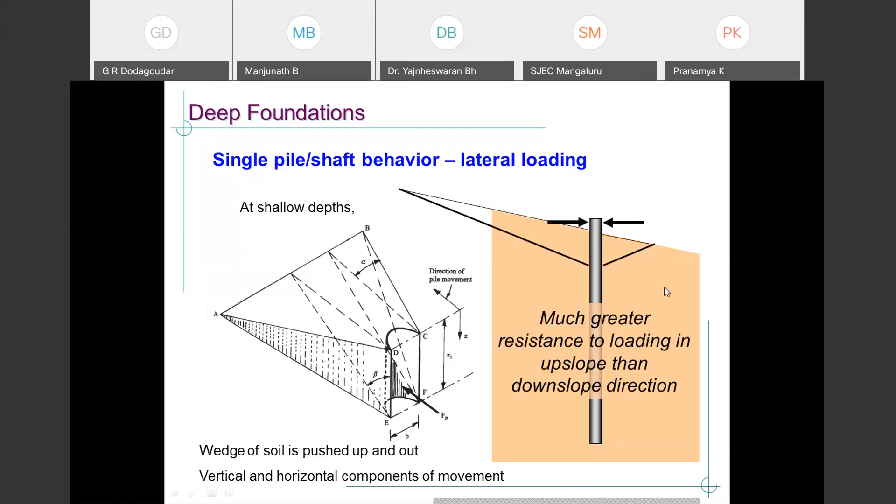And then how are you going to get the PY behavior? Basically, you have to perform the lateral load test, and you only need to have the strain gauges on either side here.

Let's assume you have designed your pile foundation for axial loading. If you have designed properly, 20% of your axial load is equal to your lateral load. If the lateral load coming from earthquake or wind loading is well within that, you don't have to do extra analysis. If it is more than that, you have to perform explicit lateral load analysis. That is how you're going to get it.

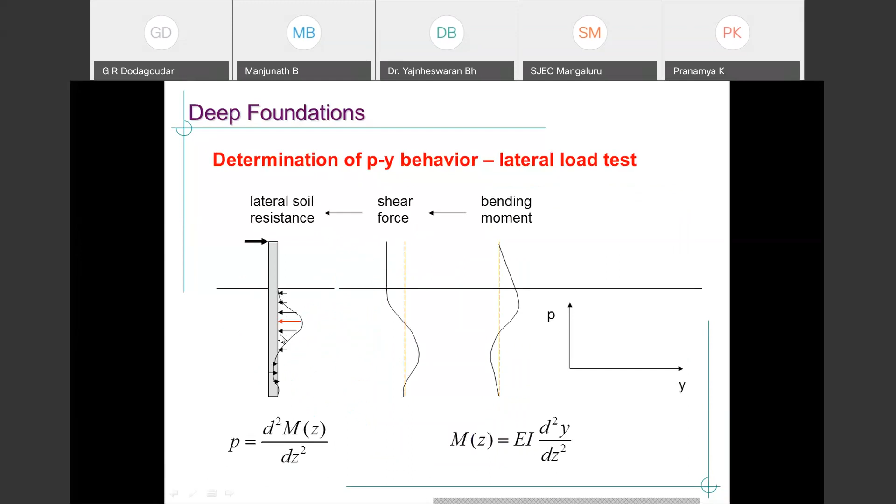I hope you know this equation. If you solve this, you're going to get the bending moment. From the bending moment, you can get the shear force. From this, you're going to get the variation of P. Once you apply certain loading, you get one P; as you increase the load, you get another P. Similarly for the variation of bending moment and shear force. Then you're going to get the complete non-linear PY curve.

Here also it is non-linear. Non-linear means lateral stiffness is not constant. There are many PY curves available for sand under static and cyclic loading, similarly for stiff clay under static and cyclic loading, and similarly for soft clay. These are the ready-made solutions available for us, all available in IS codes. One can refer to the American Petroleum Institute Code 1993, which has recently been revised. Depending on the type of sand or soil, or the type of loading - static or cyclic - you can get all these PY curves. That is how you can quantify it.

Basically, you can see from this that it is rate dependent - it increases with increasing plasticity. If you perform an experiment in the lab with increased strain rate, you get higher values for P and Y. That implies frequency dependence in dynamic analysis. I want to take you from static loading to dynamic analysis. From here, I'm going to modify all these curves for dynamic loading. That means you have to respect the fact that all these are dependent on frequency, and somehow you have to bring that in.

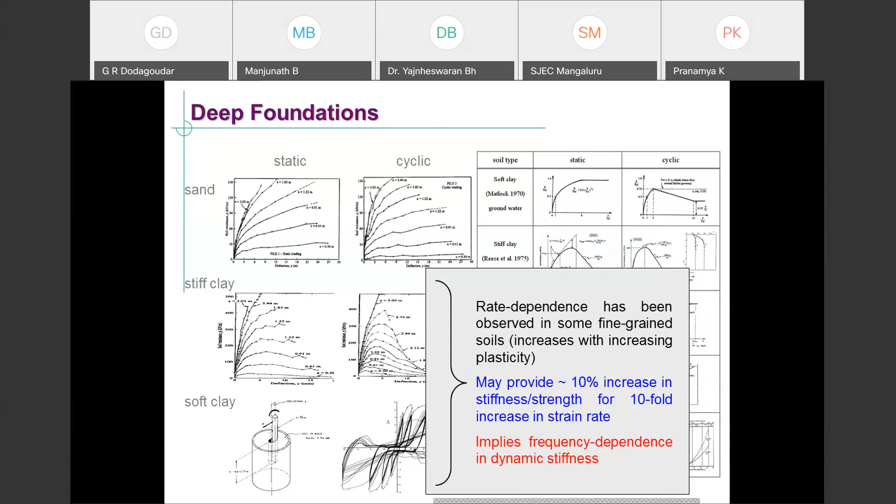Okay, and then how am I going to analyze a single pile? This is the differential equation - the theory for a single foundation subjected to lateral loading, on the dynamic beam on non-linear Winkler foundation. Near the soil, I'm going to consider the near field, where non-linear inelastic effects will be there. This is the far field, where linear elasticity will be there. If you move far off, you get the free field displacement, which is not affected by the presence of your foundation.

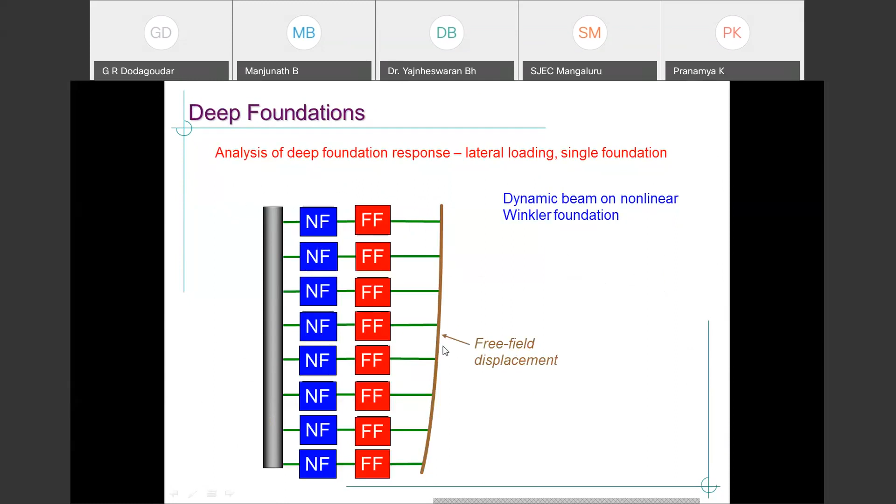And then how are you going to represent the far field? You're going to use multiple stacks of springs and dashpots, similarly making use of the stress-strain or load-displacement behavior. Here you have the far field displacement or acceleration, whatever it may be, and you have to apply this in the analysis of your pile subjected to lateral loading.

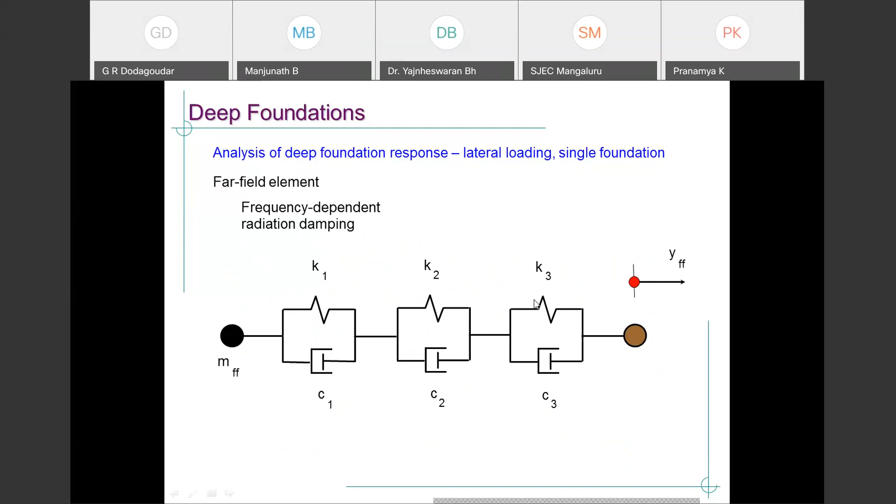There are many charts available to get the foundation impedance function - basically stiffness plus an imaginary part due to damping, plotted against dimensionless frequency. Then, how am I going to get the skin resistance? You can make use of TZ curves - these are standard curves available. What about tip resistance? You can use QZ curves. What about lateral resistance? You can use PY curves. These are the forms of loading.

If you have vertical loading, you are going to have TZ and QZ springs. If you have horizontal loading, you have a PY spring. If you have diagonal loading, then you're going to have the rotational springs.

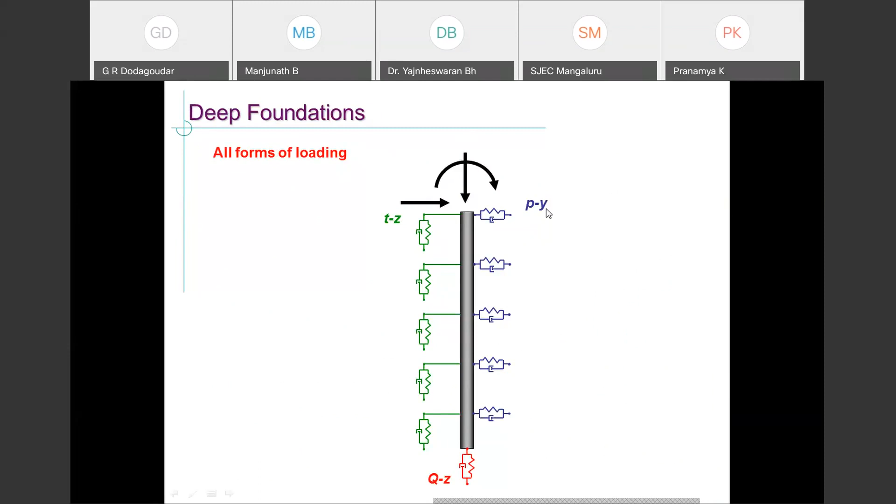What will happen if the pile is subject to vertical loading in the layered soil? This is exactly what happens. Here you're going to have the tip resistance. Vertical stiffness is governed by the entire soil profile above.

If it is subject to lateral loading, what will happen? This is how we're going to get the deflected shape. The resistance is governed by the soil in and around the pile. That's why we compact the soil in and around, to a little depth and a little away from the pile. Deeper soils may not contribute much to the lateral loading.

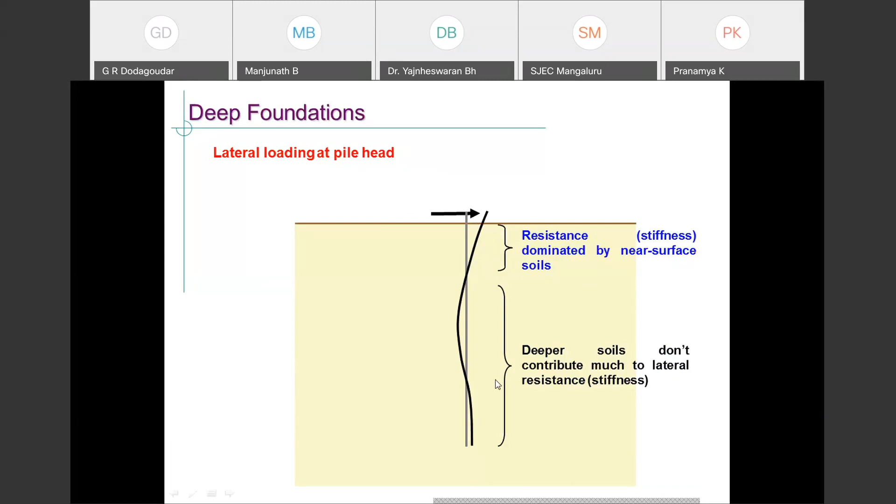The rocking and swaying are coupled. If you consider them as 0, then you are not considering the coupling between swaying and rocking. If you consider certain values for this, that means you are respecting the coupling between these two motions.

In case you have a layered soil, there are no ready-made solutions available. What you have to do is perform the PY analysis, then get the stiffness coefficients.

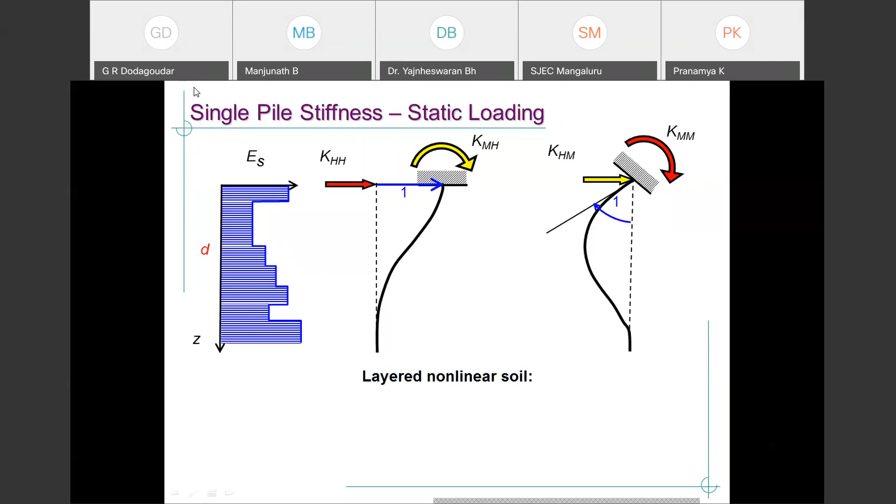Now, a little bit about what happens if you have a very flexible pile. High curvatures, but still your bending moments are very low. You may be thinking curvature is more means bending moment is more. It is not like that, because of the flexibility of your foundation. But flexural demands can be as high at depth as near the surface.

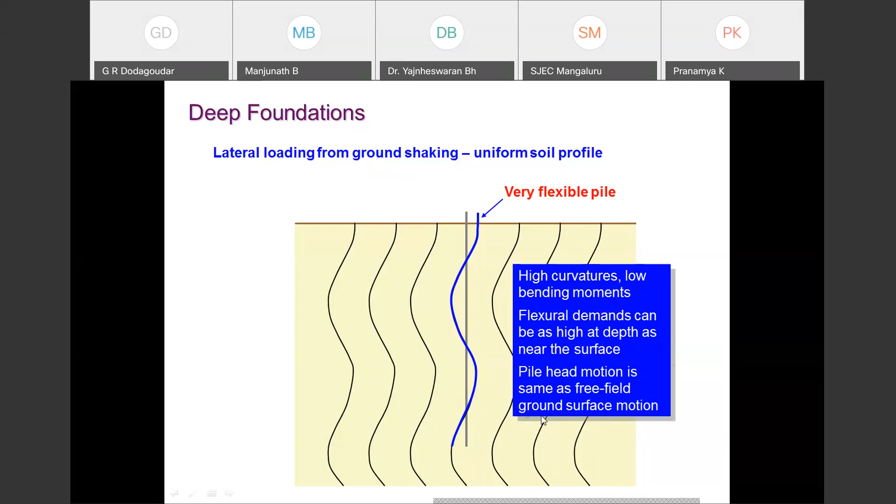If you are thinking flexural demands may not be there here, and if it is a layered soil, your pile may cut off here, if you are not designing properly. Pile head motion and free-field motions are the same here. In case of a stiff pile, you get low curvatures, but bending moments are very high.

You have to be very, very careful here. In case of a stiff pile in uniform soil, flexural demands can be high at depth as well as near the surface. And in case of layered soil, basically at the interface, there's high free-field curvature at the boundary.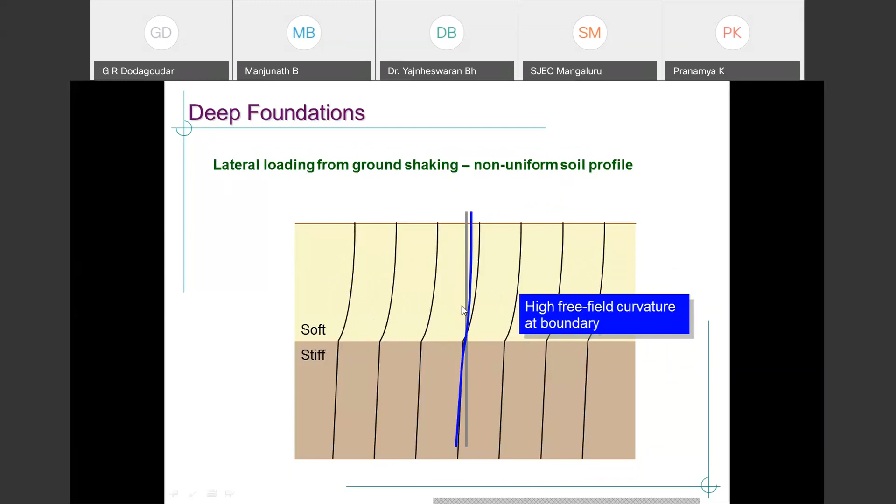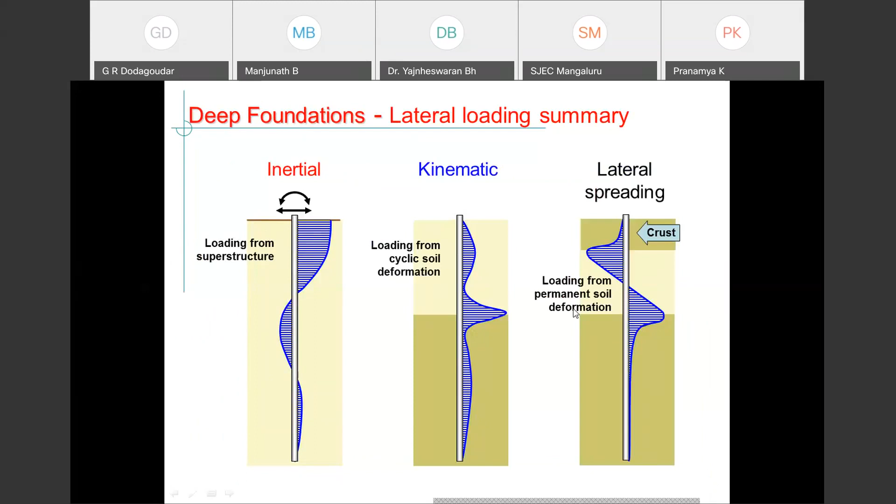Basically, this is a summary type: inertial interaction, kinematic interaction. Sometimes you have lateral spreading or permanent deformations that you have to respect in the analysis of your soil-structure interaction effects. All parts of loading are given, and the spring coefficients are given over here.

Now this is what happens in case you have a liquefiable soil. With increasing earthquake loading, the soil is going to become softer. If it is a liquefiable soil, the shape is perfectly all right, but you are going to have a decrease in stiffness.

That is how you're going to have the failure in liquefiable soil. Okay, this is exactly what happened. One can develop this by conducting tests, like blast testing.

Pre-blast, you're going to get the load versus deflection. Then after the blast, because of the blast loading, you're going to have a number of cycles of loading, and this is how the stiffness is going to decrease.

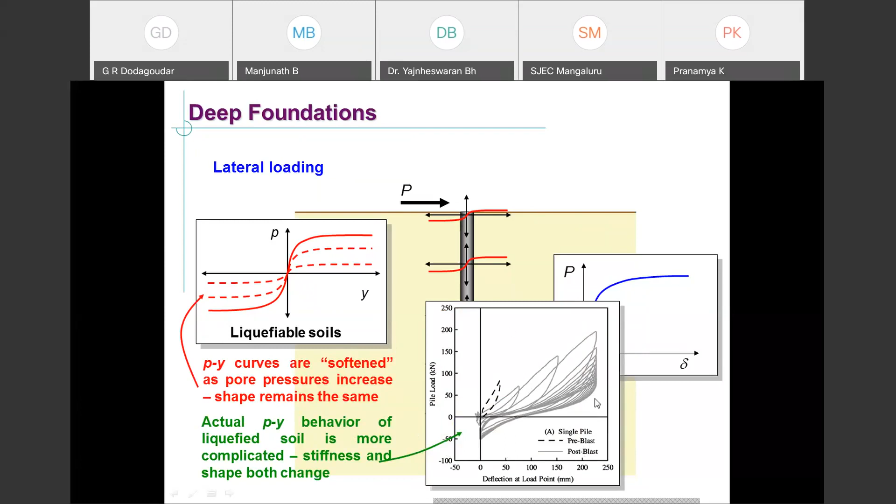And then pile groups, basically you have to understand what happens if subjected to lateral loading. Basically these are the requirements, what will happen to your pile. I want to rush a little bit, I need only 10 minutes please.

If it is subjected to lateral loading, what is the terminology? These are the zones of influence. They influence line-wise as well as row-wise, and not all piles produce the same resistance in case of piles subjected to lateral loading.

The pile-pile interaction can affect group efficiency as well as stiffness. Because of this interaction, the group efficiency will be less, and the stiffness of a pile in presence of surrounding piles will also be less. That is the reason the overall stiffness is less than the stiffness of individual piles multiplied by the number of piles.

Piles interact at spacing. Basically, if your spacing is less than 7 to 8 times the diameter, this number is with respect to piles in offshore construction. On ground, if it is less than 5D, you are still going to have the interaction effect.

Then you see these are the row designations. The first row is called the leading row. Second, third and fourth are called trailing rows - this is first trailing, second, and third trailing.

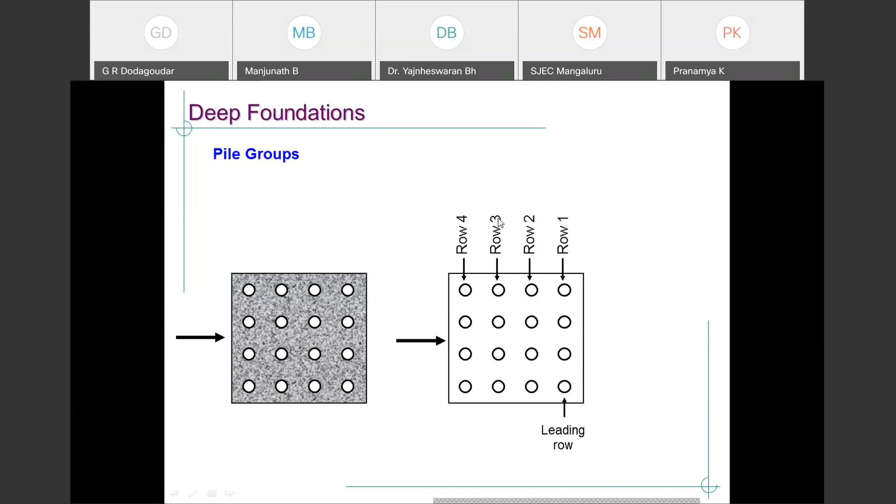Now let's see what happened. Let's assume you have performed the numerical experiment. Then you could get the average load versus deflection. A single pile is going to take a tremendous load as well as deflection.

But the first row of piles is determined using actual measurement as well as the group software. It's a software used to evaluate the pile head load versus deflection, and similarly bending moment along the length of the pile. See, the comparison is perfectly all right.

This is the second row, third, fourth and fifth row - they are going to have exactly the same load versus deflection. That's what is given over here. The leading row takes maximum load, especially in the group, while the trailing rows take less load.

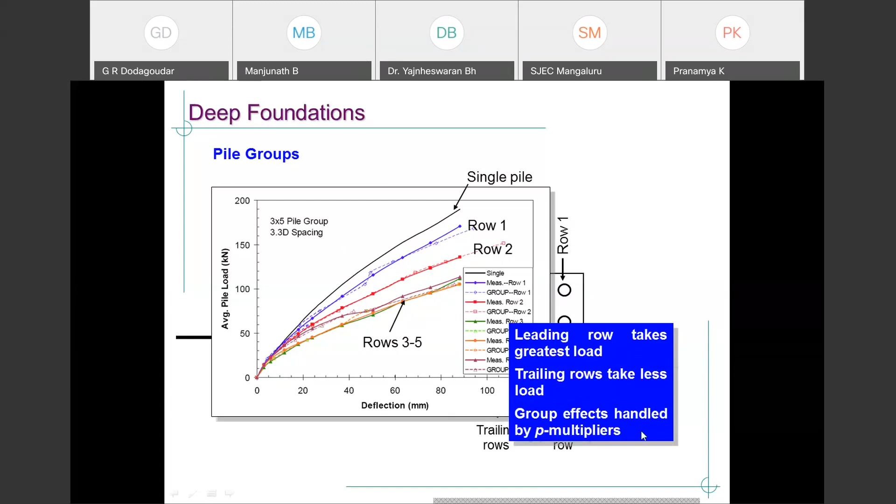Then group effects are handled by the P-multiplier. How are you going to handle it? With this, you can develop the P-multipliers. Those are given over here.

Once your spacing is more than 6D, one should not consider it - that means the efficiency of your pile foundation is very high and your interaction factors are more than 1. If the spacing is less than this, you have to consider the P-multiplier. With this, you can bring down your stiffness as well as your load carrying capacity of your pile group. That is how we will handle group efficiency as well as capacity.

This is the bending moment variation with respect to length or depth of the pile. In case of a single pile, it is tremendous, but the maximum moment in all rows of piles is exactly at the same level, subject to earthquake loading. See here, row 1, 2, 3, 4, 5 with respect to that particular pile configuration.

This slide I have taken from Rollins and others' paper. Basically, a single pile has the greatest bending moment. The leading row - row 1 - has the largest moment in the group. Usually the trailing rows, maybe after the third, fourth or fifth row, will stabilize - invariably they carry the same load and same bending moment.

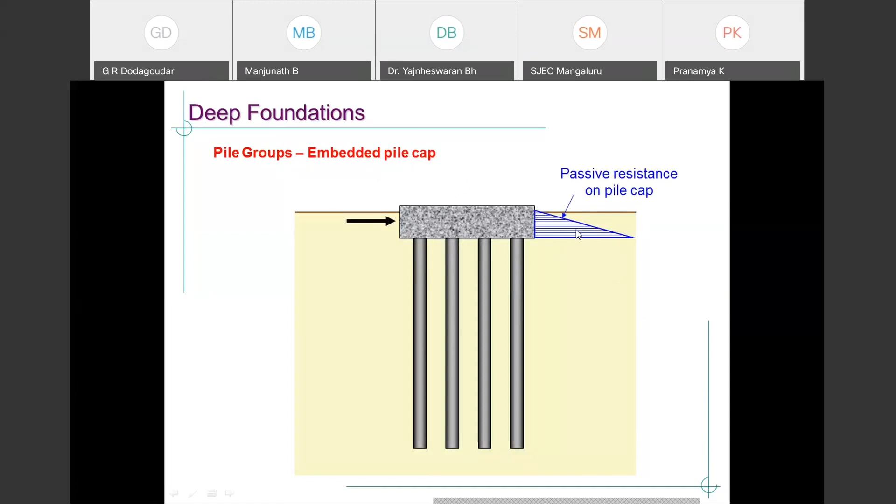If you have an embedded pile cap, you have to respect this passive resistance. Only thing is you have to compact properly, then only you can consider it. That's the reason I told earlier - do not excavate outside the forms. Anyway, I'll rush through that - please just go through these things, you'll understand.

Then how are you going to get the stiffness coefficients for the dynamic analysis? This is very, very important. See this particular formula - anyway the theory is given over here. Especially your elastic resistance is in phase, while your viscous resistance is out of phase by 90 degrees.

Let's assume I know how to get the K-static - already I have given the explanation. Then you have to have the multiplier.

It's called a stiffness multiplier, but it is a function of frequency, because earthquake loading means you will have n number of different frequencies. Depending on the frequencies, it's going to vary.

Now see carefully this particular slide. We have considered this variation, and this variation. Already these formulas are given, I have extracted from this table. This table is given in the foundation vibration chapter written by Gazetas. It is available online.

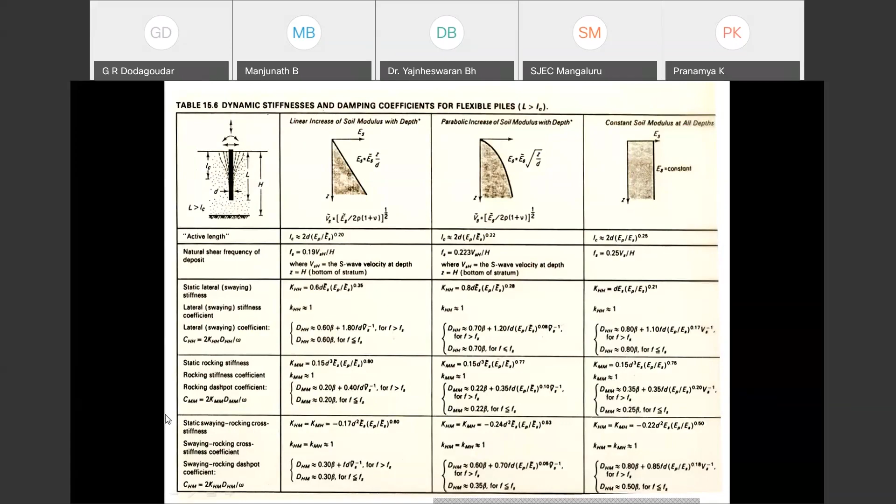Then how are you going to get the damping coefficients and all? See this carefully, and then what you have to do here: if you plot and see carefully, this is our non-dimensional number, that is omega d by Vs, where omega is the frequency of your ground motion, d is the diameter, Vs is your shear wave velocity.

See this carefully, what will happen to your KHM and all. No doubt they are non-linear. If you draw one line, okay, that's idealization. See this carefully, what will happen? Frequency dependence for single piles is not that strong.

If it is subjected to lesser earthquake loading, take for example you have moderate earthquake loading, 5.5 and down, that is an earthquake magnitude expressed in terms of Richter scale. If it is 5.5 and down, that means this effect is not that strong, so you can consider this particular K of omega as 1.

Start with that. Once you consider this, basically you can make this statement: it is not uncommon to assume K of omega is equal to 1. Even though it is dependent on frequency, still you can consider your multiplying factor as 1, and then you can go ahead and analyze.

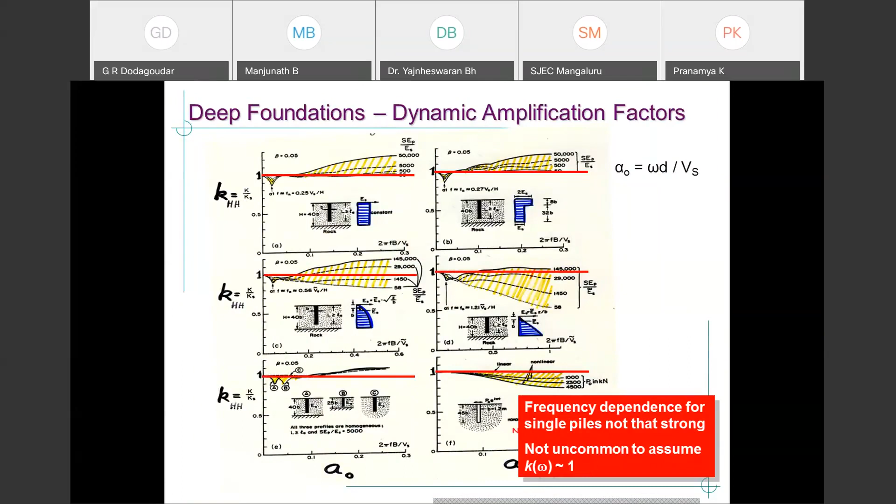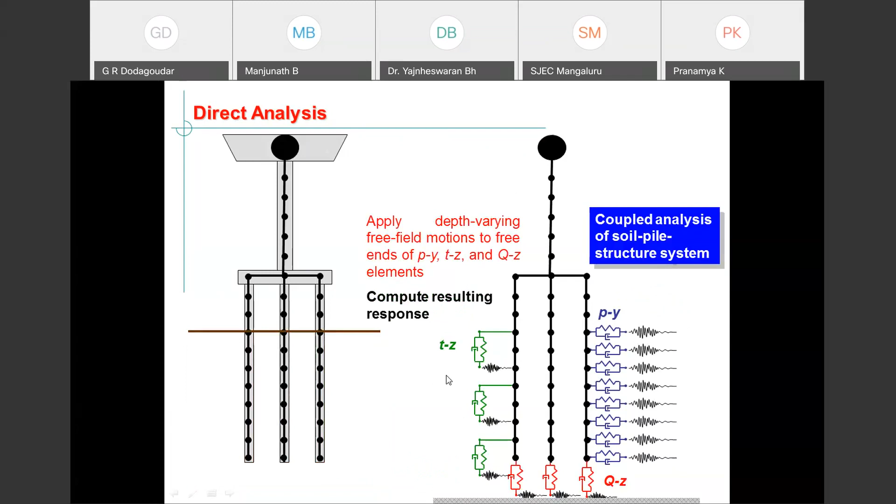That is what is your free-field response. You apply all your free-field response at all these points. You are discretizing the soil using these springs. Then you have to apply all your free-field motion, basically it is the acceleration. Then you have to compute the coupled response. That's what you are doing.

In case of the substructure approach, you cut at this level, it's called the mud level. Let's assume it is in a river. Then you see basically what are you doing: cut piles at mudline and replace with springs and dashpots. See this carefully, let's assume it is a 2D analysis. That's the reason you're going to have 2 translations and 1 rotation. That is how I represented it.

Next, what you have to do is apply kinematic pile motions, what you have evaluated earlier, along all these springs, and then compute the response. That's all you have done.

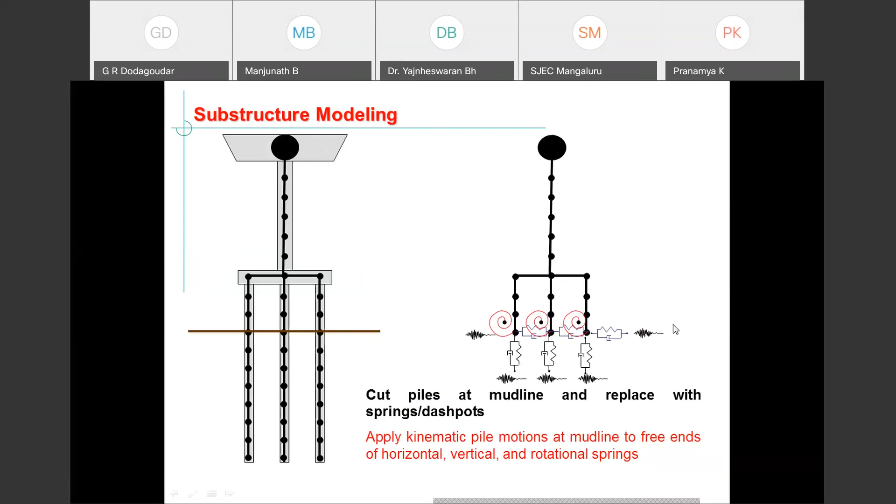And then apply kinematic pile motions to all these springs. This is a horizontal spring, vertical spring, and rotational spring. And then compute the response. Okay, this is how we're going to compute the response. That's it, now you see basically what happened.

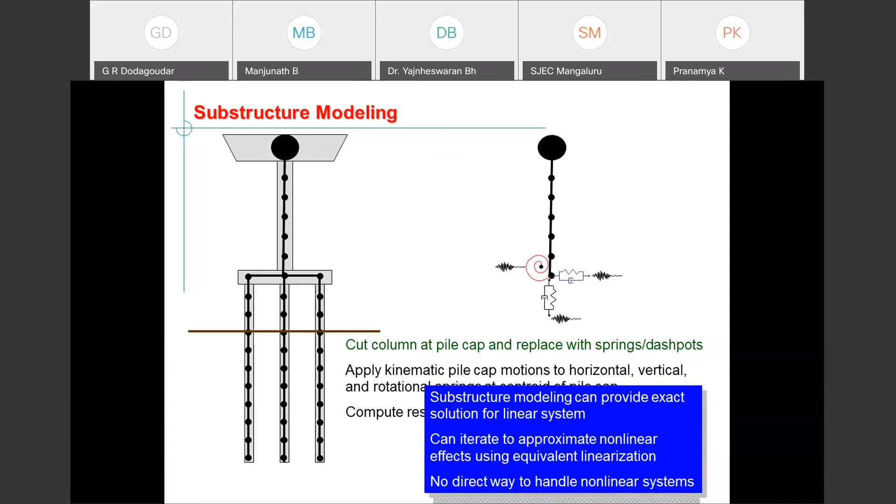It can iterate approximation to non-linear behavior using equivalent linearization. Even though you suspect there are non-linear effects in soil as well as in foundation, you can use the equivalent linearization approach in order to evaluate your structure response. There is no direct way in case of substructure modeling to handle non-linear systems.

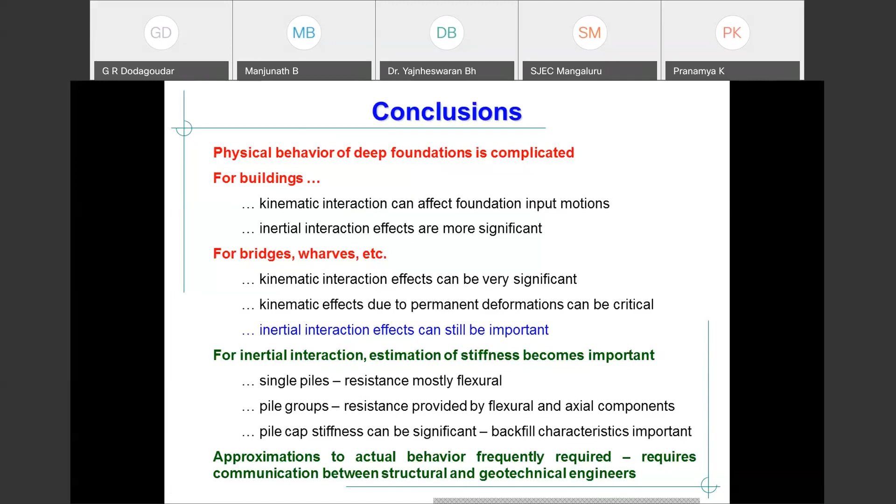You have seen a lot of approximation. Without approximations, you cannot perform soil structure interaction. Only thing, further understanding is needed. Once you have sufficient qualified understanding about soil structure interaction, you can do refined analysis. However, it requires communication between structural and geotechnical engineers in order to properly analyze soil structure interaction effects, whether the pile is there or whether the raft foundation is there. Accordingly, one has to go for soil structure interaction analysis.

Thank you. These are the concluding remarks, especially for the young ones. Please see very carefully: structures are seldom built earthquake proof, but built earthquake resistant. Geotechnical considerations play a vital role in evolving design ground motions and earthquake resistant design.

Basically, it is our activity to give the design ground motion to the structural engineer. In turn, they will use those in order to design structures for earthquake resistance. Seismic codes help in designing earthquake resistant structures. We have seismic codes; you can use that also.

Sound construction practices are extremely important. One should not think of some other attitude during construction; that's the reason there is no margin. That means never compromise on quality of construction. No matter how complicated analysis tools you have, no matter how complicated design tools you have, if you are not constructing properly, you will never achieve anything great on the ground.

Above all, awareness: that means earthquakes do occur, that much knowledge is a must. Once you have that knowledge, it's not enough; you have to have proper understanding. Once you have proper understanding, on top of it, you have to have the will to implement or the will to do whatever you have understood so far. These are the mantras for successful utilization of any tool for soil structure interaction analysis.